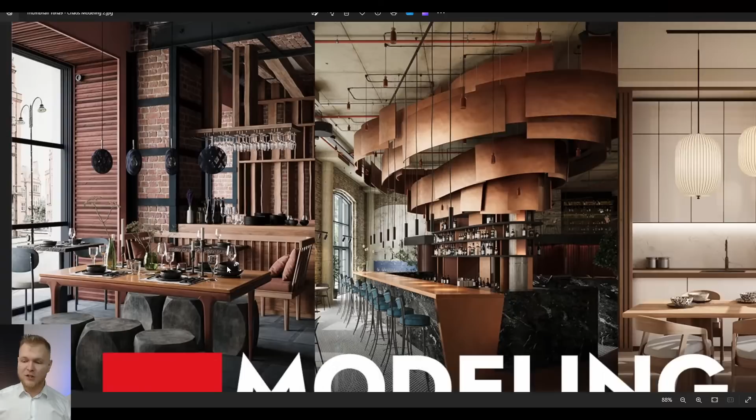Now, since I am legit now, we're going to continue by moving on to our actual work. So as I mentioned, we're going to be talking about this interior. For some reason, and lucky for me, you chose this one, and to be honest, this was the second easiest interior, because this one is number one when it comes to the level of difficulty. This is level 2 and this was level 3, so lucky for me, I'm going to be working with medium difficulty, and I think we're going to have a lot of fun.

What we're going to be dealing with is our student's scene, which was created by Kamila Kosarzecka, and thank you very much for sharing this beautiful scene with us. This scene was created during our training, but this is beside the point, because today we're going to be dissecting the scene and building it from scratch.

To make this possible for you viewers, we're going to be also sharing something quite cool, because you're all going to be able to download this pretty easy floor plan, but I did set up a few traps here, because in order to get all the measurements, you're going to have to follow my video, which is actually a nice trade-off. But let's get into it.

I'm going to try to put as much knowledge in it as possible. Also, we're going to be talking about a few elements. So, for example, how to create this type of lamp, because I believe we're going to be able to explore a few cool tricks. How to create wooden beams and how to make sure that your wooden elements do look a little bit used and a little bit more, well, let's say aged. On top of that, we're going to be building those funny chairs, and well, probably we're going to be building a lot, but I would like to put a disclaimer first that we're going to be also using some pre-made objects that you will also be able to download or find online.

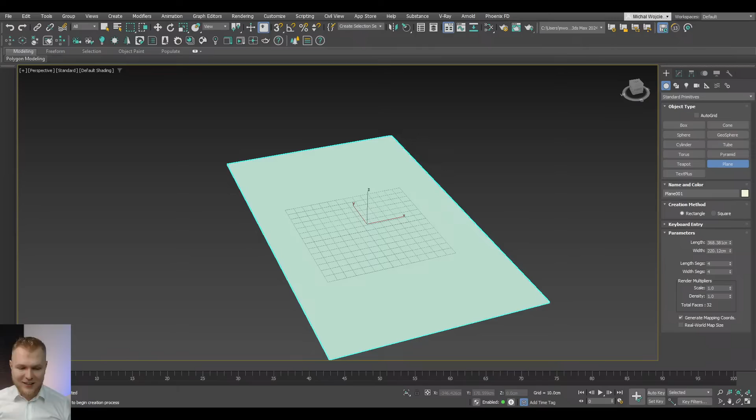Oh stop, it wasn't the campus, but keeping it realistic. Oh sure, sorry Theodore. So not the campus, but keep it realistic. Sorry for that, Theo. I don't want to oversell you, but still, I'm going to stand by the part where you're an awesome guy.

By the way Mike, what tool do you use to write on images in real time? I mean the pencil, it's called Epic Pen, and this is how it looks, this is what I do, so you can use it as well. I'm too lazy to set up any shortcuts for it, so that's why I'm not getting any faster clicks, but regardless, let's continue.

So the first thing we're going to be doing is dropping our image not as a background, but as an image on top of what we're dealing with. So I'm just going to drop it here. The idea is that we're dropping it in order to use it as our backplate or template for what we're going to be building.

So it's a good idea to also read some specific information about the image itself. Sometimes you're not going to get this window, and turning it on in some versions of Windows isn't really fun. The best thing you can do is hold your mouse for a second to get the dimensions, or right click on the image and go to Properties, Details, and get the dimensions: width and height in pixels. We're going to be using those in a second, so I'm just going to write them down in my 3ds Max.

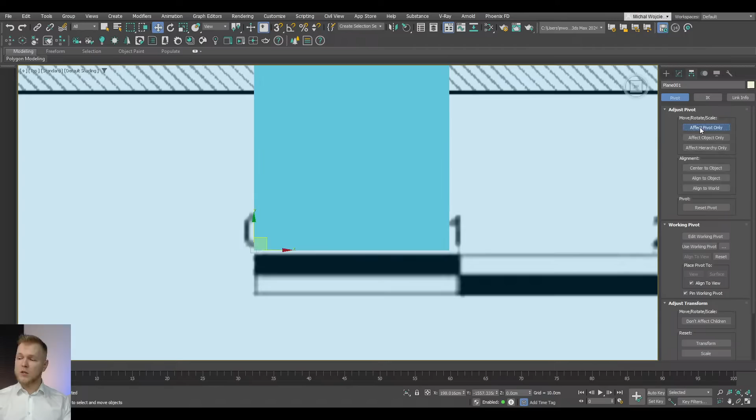I think I am going to rethink my life and quickly click that and go for the affect pivot only to adjust it a little bit further. So now we're going to be scaling it down, up until I'm satisfied. I'm pretty satisfied with what I've got, and remember, if your image has 3 to 5% of imperfections, it's not going to be something that you can really see, and nobody's going to be able to really notice.

What we're now doing is we're creating this image, so it's for those of you that just joined in.

Okay, we've got, hi Mike, I'm from China. Now it's 1 a.m. Beijing time. How's China today? Sir, I watch your speech with subtitles later. I focus on your speech and the model ends suddenly.

Okay, makes sense. So we're going to try to get some kind of software that will allow for the subtitles to be created during the live stream, but unfortunately right now we do not have the technology.

Okay, we've got religious people again. Blender is the best. Yeah, and nobody asked, thank you.

Now let's continue. Okay, so the first thing is a plane.

Yeah, obviously. Oh, hello, Monique. Hi, how are you doing?

So, why didn't you just snap it corner to a box? That is actually a very good question, because we're going to be introducing snap in a couple of seconds, because remember, we're trying to be beginner friendly as always. So I'm going to try to give you a little bit of a margin for mistakes, but we're also going to try to get better results.

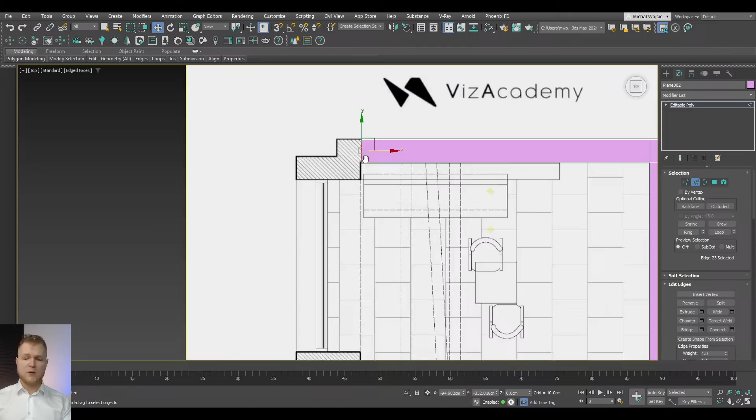So what should you do? Are you going to be just shift dragging and splitting it in half? That's going to create unnecessary geometry in your case. So feel free to just move this element a little bit to the top, so you're able to move this downwards. Since you're here, you've got two options: either aligning those vertices by eyeballing them, which is silly, or press R, select uniform scale, and scale this down. By scaling it down at least twice, we'll get to a point where it's essentially flat.

Now we're going to be moving it slightly lower, and again shift dragging those elements. To ensure everything is aligned, I can select all the vertices and quickly shift drag them to make them nice and flat, and repeat that process here. We'll continue by shift dragging those elements to create the window. I'm going to go all the way to this point, continue here, and probably also here, but I want to close those walls.

How do we do that? In normal circumstances, you'd shift drag this and then weld those elements, which is the correct way of doing it. But what you can also do is select the opposite edge and go for bridge. In this case, it's going to be nice and easy.

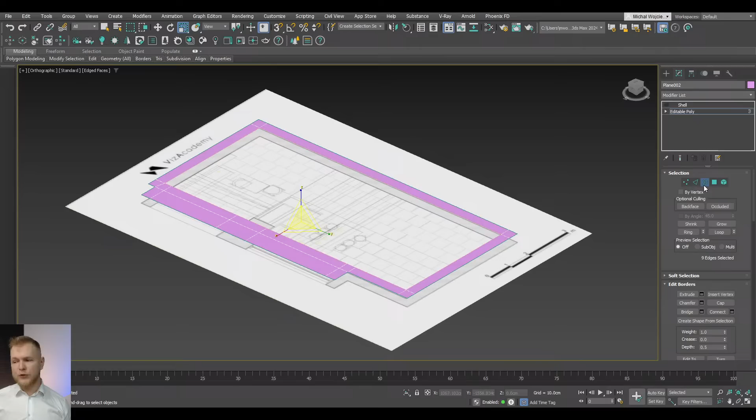And we do the same for the inner part, so we go for create shape from selection again. This will also make it clearer why I used the method I did, because we're cutting corners and saving a little bit of time.

So now we're going to get to shell. We activate the shell, and typically, if I know how many windows I'm going to get, it's going to be just one opening for the windows, possibly for the doors too. So you know you're going to need those extra elements. In order to make sure no light shines through your building, you can go for the outer amount and inner amount.

So the inner amount is going to be approximately 15 — we go below 0, so we're digging our object a little bit deeper. Then we go for the outer amount, which is going to be 420 — which is 420 for those of you interested in that, but no, I'm just joking, sorry for that.

Anyway, we're going to be adding 2 extra lines that will be very helpful, so 2 extra segments, and those are going to be our openings for the windows that are so important for this project.

Typically you'll also have doorways, but we're only focusing on the main shot itself. So we're creating one camera that we can move around a little bit. We can place it here to look at everything in this vicinity, or do a couple of close-ups for the props. That's going to be handy a little bit later.

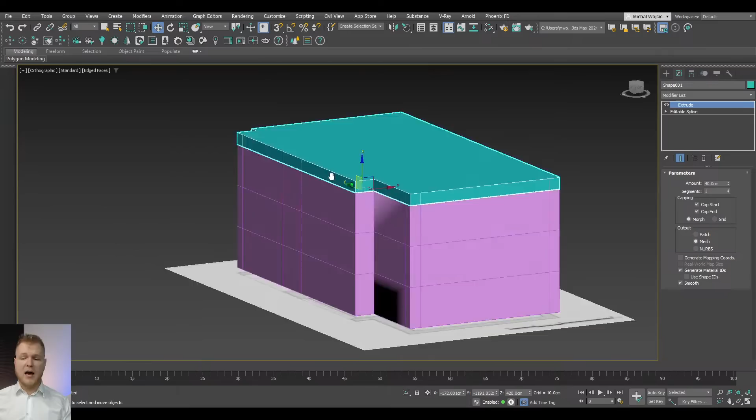Now we're going to copy this object, which will be our ceiling — Control V to copy it again, minus 40 for the object, and place that copy at -1, or actually -2, to make sure our floor, once it's inside our object, is taken care of. Now you can see we've created a closed block.

Why do we do it this way? First, we want to absolutely ensure no light bleed happens, and by adding two separate objects, we make sure no light passes through any of our geometry, which is fine, I guess.

Now we're going to select the edges. Remember the edges are also created inside your mesh, so we have to select all of them. Go to vertex selection, select everything you've got here, and type in -1. Why -1? Because that's going to allow us to get a little bit easier floor detail in a second.

Now we're going to type 320, because that's how tall our windows are going to be. Then we can Control Q to do a little bit of trickery.

So, number 4, we select two polygons and shift-drag them like this. For those using an older version of 3ds Max, you can do the exact same thing by selecting those two polygons and going for a bridge — this essentially creates the same effect, but swift modeling is a little bit easier if you're using a newer version of 3ds Max.

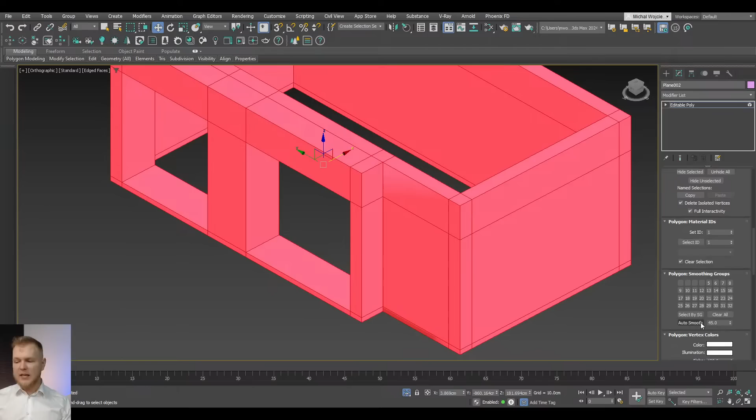You can see there's a little bit of glitching going on here on my model. That's due to unforeseen circumstances I cannot explain — it's just the smoothing groups acting up funny. So what we can do is go for element, scroll a little lower, and here we've got all of the smoothing groups. In my case, I'm going to clear them all, and that's now problem solved.

Amit, hello, nice to have you. How are you? It's full guide, or yeah.

I hope I can create similar renderings like Mike one day. Well, there is a chance that if you're going to be following Chaos Campus and our YouTube channel, you can actually do that. So let's go ahead and show you another cool trick that I use all the time.

You click on the top of your ceiling, go to Object Properties, and to make sure that it's not going to be getting in our way, we're going to be displaying it as a box. In some cases, if you're working with more complex scenes, you may also want to start using layers. In my case, because we want to keep it simple, I'm not going to be putting elements on layers, but since I mentioned it, it's that simple.

New layer with object selected, and now I can just name it ceiling, and for example, freeze and unfreeze the whole thing. So in my case, it's going to be just an object that is frozen because it's working within the layer boundaries. So no longer can I select this element, so it is not going to be getting in my way, but I do know that I did create the element, and well, I'm good to go.

So now we're going to be using the other shape that we also created earlier on. So this shape is going to be our floor. Let's rename it to floor 001 because we're going to be using this twice. Now I'm going to be selecting the edge. Press 2 on your keyboard, go here, and we're going to be shift dragging this a little bit deeper, up until to the point where the windows are going to be placed.

So in that case, we're going to be going for the object that we also created, which is our floor 002. But now with all of those lines, this is getting a little bit cluttered. So this is the point where you can start using the layers if you want to, but if layers are not your style, you just press H on your keyboard, and this is the select from scene or object color. So we're going to select the object 002. Now we're smart, so we know what that is, so we can select it, and it's easier for us to manipulate the whole scene.

For the first time, I'm going to be also recommending you to get your hands on one of the plugins. It's free for you to download from CG Source. So this is the website, and go to CG Source and look for floor generator.

The installation process is absolutely the easiest thing ever, and the free version we're going to be using works with a standard running bond, which is pretty much what we needed. I could also use Corona Tile Map, but setting it up in some cases is going to be more complicated for beginners than anything else.

In this case, I already have the floor generator installed. So if you do need it installed, please make sure to pause the video, go get it done, and come back to us, because you're probably not tracing everything I do right now since it's going to be a bit too fast. At some point when you're working on your own scene, that's what you can do.

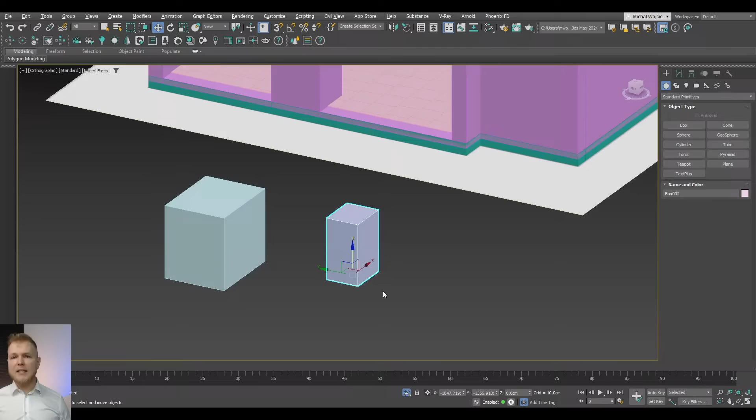So instead of risking that your object is going to be slightly above the ground—because in this ortho view it's impossible to tell whether the object is on the ground or not unless you're looking at a very certain angle—if the values are very small, it's really impossible to tell.

That is why, to make sure the tiles are going to be in the right position, we always try to make sure our floor doesn't exceed 0. Unless you're going to have some carpets, that's going to be a little bit different story.

Here we're going to go for the ground length, and we're just going to be adding some nice values. 3-4 centimeters will really do the job, but we also need to add the minimum offset of approximately 50%. You can also get the maximum and minimum, so it gets a little bit more random at times—you can see the pattern is now a little bit crazier, and this is going to be good for some scenes. I noticed not a lot of people actually use this option.

Hello from Afghanistan. Why doesn't the see-through work? What do you mean? I'm not sure what you mean, really. Could you elaborate on that?

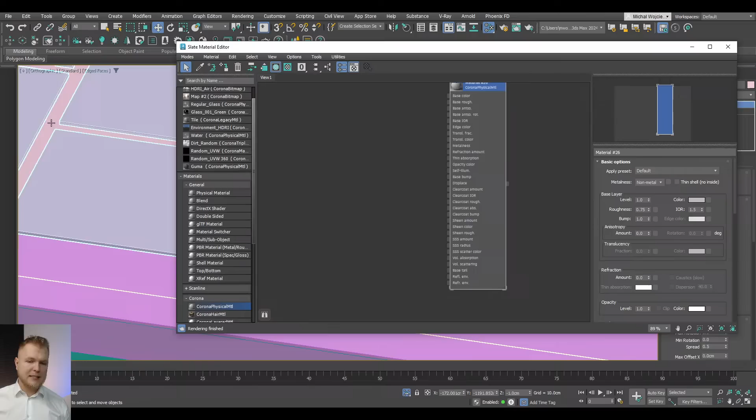What I prefer using instead is Corona round edges. As we're going to be actually using it later on, I can prepare a mock-up of the material to show you why I would be going for something like that. So Corona round edges, and this is the chamfer, or what I would be using instead of chamfer.

First of all, we're assuming that this is a tile. This is not an object that we're going to be viewing from close-up purposes. So since it's going to be just part of our scene and not the main element of it, we are allowed to not be as precise with everything. Now, since we're here, I'm going to have to set up some kind of simple lighting.

For that, I'm just going to go for a single map and add in Corona Sky. Later we're going to be editing that, but for now we're going to be able to get this done.

So the reason why you would not use chamfer is that, first of all, chamfer is going to be adding a lot of geometry. Bevel is always going to be very stiff, and it's going to create only one line, and Corona round edges is going to be very flexible, and it's going to absolutely obliterate all of those options with one simple trick.

I'm going to explain all of that in a sec once we reach the materials, but if we create a very nice looking material, look how chipped the edges are on my tiles, and this is something you cannot get with chamfer.

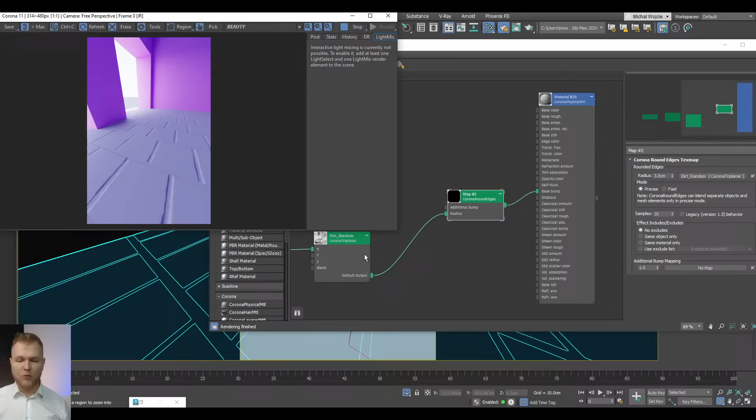So long story short, this is the right way of doing things, unless you're going for close-ups. Then you're not going to be that happy, because you probably want to use the chamfer.

Okay, so now I'm going to be moving a little bit to the left, because I've noticed that I was a little bit on the edge of the screen.

Mike's right, of course. If you want to save resources and render time, round edges is a great option.

I'm just very much into small details, and this is why I tend to go with chamfer. It's just like I like it more. That's it. Because a lot of times it's not about calling the technique proper or not. It's just that sometimes you feel more comfortable with something because you know how it works, you have more control over some aspects you want to work with, and that's when you select the technique you feel more comfortable with.

After all, we're artists, so we're not necessarily going to call everything proper technique, that's why we call our tricks techniques and tricks. So yeah, we're pretty much martial artists, but in 3ds Max, and nerds in front of computers.

Okay, got a little bit into a dead end there. Also thinking the same.

Hello from Egypt. Hello from India.

Hello from South Korea. Sir, can you hide objects while working on one object?

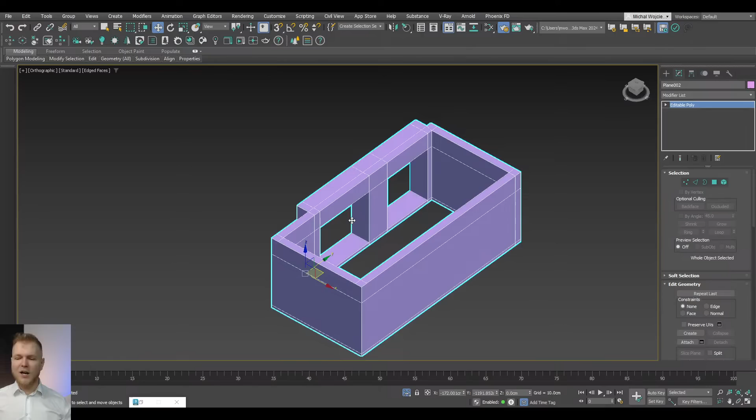V-Ray can be very rewarding but also very punishing. I never had a situation where I left my render overnight in Corona and it turned out I used the wrong number of samples and the wrong anti-aliasing algorithm, messing up the whole render, only noticed on the second frame because the first was perfect. That's V-Ray, while Corona is consistent, predictable, and easy to work with. That's why I'll always choose Corona, though V-Ray isn't bad - it just requires you to be a bit of an engineer before you get good at it. It's the type of software where you have to get good.

Now, why don't you use the extrude for floor generator? Why don't you use extrude for floor generator?

We did use extrude for floor generator. In this case, you can see I'm using it with a certain value to make sure I'll have full control over the tiles once I set them up, because I'm going to be doing more than just placing them.

Mongolia, that's a first - I never had anybody from Mongolia in our chat, thank you for joining, Nimba. I'm looking at you from Brno, Czech Republic. Oh nice, Ludek, that's where Corona was actually created. Your seminars are the best, I haven't found a better one anywhere. Congratulations - thank you Ludek, I really appreciate that, that was absolutely out of nowhere. If you go to Prague you can actually visit Chaos or Corona's main base and have a little bit of a tour there. I'm going to visit them at some point.

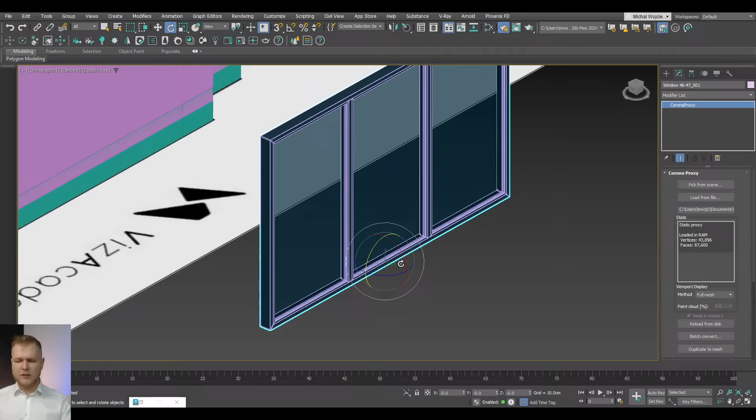So what do we do with a window like this? We only want one window. With three bars, we could just rotate it, but that's not what I want to do in this case - actually that would be a little bit smarter than anything else. So, I'm just going to duplicate this to mesh. I'm still going to follow up on the idea I had in a second.

If this is going to be problematic and you want to have only one frame, you can go for a symmetry modifier. Instead of adding geometry to your model, you can actually reduce the geometry. But be aware that symmetry is always going to cut with a certain slice threshold, so you want to turn that off and make sure to weld the seam, otherwise we're going to have a bad time. So let's lower the slice amount, and now we're no longer welding the elements we're not supposed to. Let's move this a little bit, and now we have just one frame. That's a very neat trick if you ever need it.

Let's go ahead and continue. This window, I think, we can rotate it by 90 degrees. Nobody, I guess the window police isn't going to come to Facebook, so we're just going to continue with very cheesy puns.

Now, because I want this window to fit exactly where I want it, I'm going to isolate those two elements. Since the object by default almost fits, I'm not going to need a lot of changes, but I'll make sure it's placed a little bit inside of the wall. Now I only need to go to editable poly and move the element as much as I need. In this case, I can follow up with any part of my window, but I'm just going to make sure to move the elements under 1 and 2.

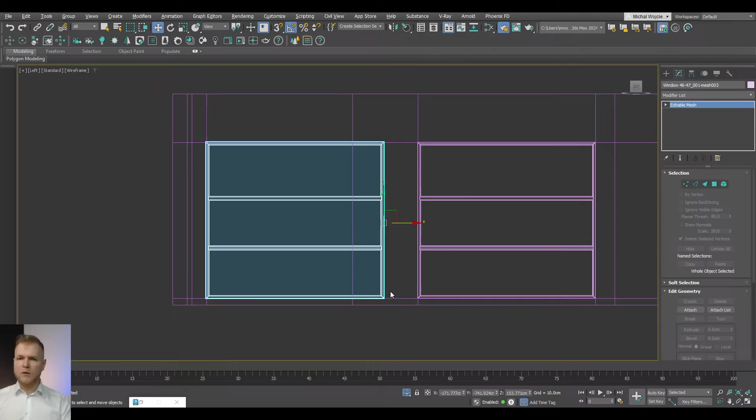So why am I not using snap again? Because I don't want to. It's really not a good idea to always snap to every corner and every aspect of your model. Sometimes you want to allow objects to intersect, as you're going to gain a little bit more thanks to that. What are you gaining? Well, intersecting geometry in older versions of Corona and V-Ray was a big problem because sometimes some maps, some light could bleed through the walls. Today, the rendering engines are so sophisticated that it's no longer that much of a problem, so I believe it's actually better to leave it that way.

Looking at the floor plan, which is buried way deeper than I wanted, we're going to hide the floor for a second, and you can see there's another floor, another detail here. This is a box that I'm going to use as another detail. You can see that this brick wall is very important for our build, so we need to keep that in mind, and we're just going to create a box. Yes, that's how you can handle it—it doesn't have to grow out of your wall, it doesn't have to be part of the mesh. This can be a separate element, and that's going to be more convenient for us as we're going to be adding a bit more detail to it.

So let's drag it up. In this case, I'm going to place it at somewhere around 330. Shift drag it to the top. Again, I can intersect through the walls, doesn't matter, and we're just going to go here. Because I want this to be symmetrical, I can make it symmetrical by simply using a symmetry modifier and going for that—either flip it or make sure to rotate your mirror along the axis. So convert this object to editable poly, and the reason we're holding this object as we are is that we're going to be adding a few extrusions here.

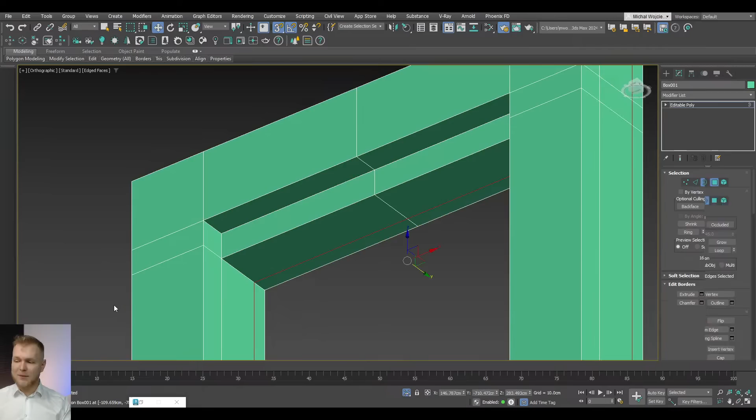cut this element out. Normally, you would be going for delete and trying to chamfer or bridge all of that. But now in 3ds Max, we can be a bit lazier than that. Shift, drag, and voila, we're done. No welding is going to be needed, but be aware that sometimes this technique can actually give you a few headaches because it's going to be imperfect.

On the opposite side, I'm going to do the same, and I'm going to adjust one of the sides in a second. Doesn't matter which one, because we're going to be able to use symmetry if we want to.

So in a second, we want to create this T. You can see that we want to basically create a double T because there's going to be two of them, and those are going to be held by some kind of extra elements around all of those objects. So how do we do that?

Well, obviously we're going to be starting with the most primitive possible options. So let's go for a simple detachment, detach as clone, and we're just going to continue clicking. To make sure that this object is going to be nicely connected, we're going to go for connect. Now we can also adjust some of the pinch in order to make sure that our T is going to make more sense.

Again, we're going to go for the same technique, but this time we're going to be lowering the value. If you are lazy like me, you can actually skip deleting this part and just create a larger C, but just for the sake of consistency, let's delete those two elements and pretend that we cared.

Now, shell, and let's just clear out the values. 15, okay, and the 15 is not needed. Convert this object to an editable poly, and we're going to be dragging it all the way to the opposite side. So again, it's nice and easy.

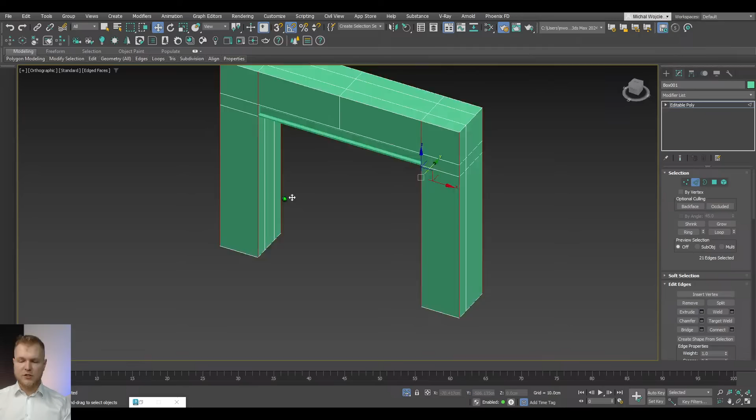So we also need those extra bars that are holding everything. So the easiest way of doing it is to double click, continue double clicking. It's very important to double click, but not too much. Double click again, double click, and we're trying to select all of the edges that we're interested in. So pretty much that. As long as we selected all of them, we're going to be able to create what we need.

Create shape from selection. This is one of the most efficient tools in 3ds Max, really. Yes, creating splines out of your edges is just such an easy way of working with 3ds Max.

And now to have full control, I'm going to go for rendering, enabling viewport, and we're just going to make sure that instead of radial objects, we're going to have rectangular objects, and we want to be smart with it, so we're just going to be making them a little bit larger.

So here we now have something that covers our walls, but in some cases you might not be very happy with it, so you're going to be probably a little bit inclined on using actual properly prepared elements. But in my case, I'm going to be saving a little bit of your precious time by doing this the way I did.

Because again, it's going to be easier and faster, and the difference of 1 centimeter at the distance from the camera is not going to play a major role. So it's just easier to do it that way.

But if you want to be precise, I do suggest you use the sweep modifier instead. The sweep modifier can pretty much allow you to create the angle, and that's pretty much going to be the end of it, as it's just going to be easier.

I should have used the T here. Yeah, so let's continue, but without the sweep modifier, and possibly convert to an editable poly. Perfect. And now we're going to be continuing.

But to make it super easy, first clean it up a little bit, or cut out what you need in AutoCAD, create a new file, save it that way. Then once you're there, you'll be able to clean it up in 3ds Max, which is efficient. Working with those files directly in 3ds Max can be overwhelming, so I don't recommend that.

Okay, so let's convert this object to editable poly. In my case, what I'm going to be doing is I'm just going to try... Sir, can you do how to create a realistic V-Ray material?

I mean, we could. You know what, I just figured something - those edges are really looking good, but I figured another thing I could do because it's a box. So give me a second.

I'm just going to quickly recreate this up until this point. Sorry for changing this method, but I figured it's going to be fun and educational for you to also use one extra option. So let's attach this, and now we've got those edges, right?

In my case, I want to make sure I'm using chamfer, but not the smooth end. Sorry, not that - wait a second, yeah, this option. So we're going to be reverse chamfering, or deleting what is not chamfered, so it's a little bit easier.

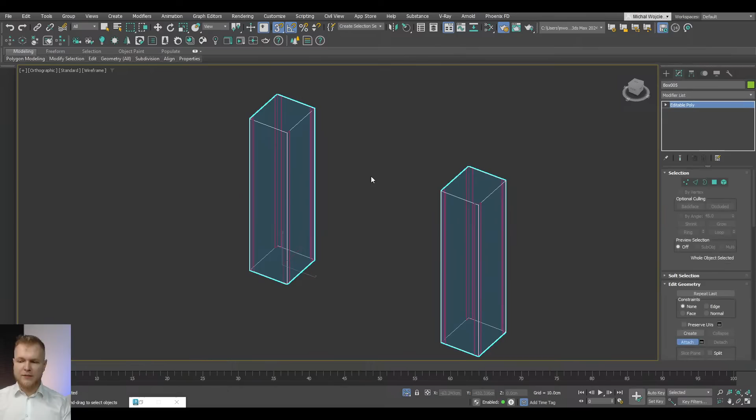So just purge the file in AutoCAD before importing it into 3ds Max. Purging is good, but sometimes it just doesn't do what it's supposed to, so it's not the golden standard, I would say.

So in this case, let's go for, again, 8 centimeters, 6 probably, 4 - yeah, 4 looks nice. We're going to be clicking here, and we're again in the clear. So to add this on top of it, we're going to be adding that extra shell modifier, and we're good to go.

So now we've created all of the detail, and now we're going to be continuing building our interior. We need the ceiling, we need the beams, and we need to start adding the props. The props are typically going to be downloaded from Chaos, so it's going to be way easier for us to set up everything. I want to set a camera as well, so we can test if we made some major mistakes so far. So let's go here, we'll see.

Shift F - so Shift F turns on the safe frame. Safe frame is going to allow you to pretty much look through the window exactly of what you're going to be rendering. The proportions I'm using are 1080 by 1650, so it's going to be slightly easier that way. So again, we're going to be adjusting our camera up until we're satisfied with the view.

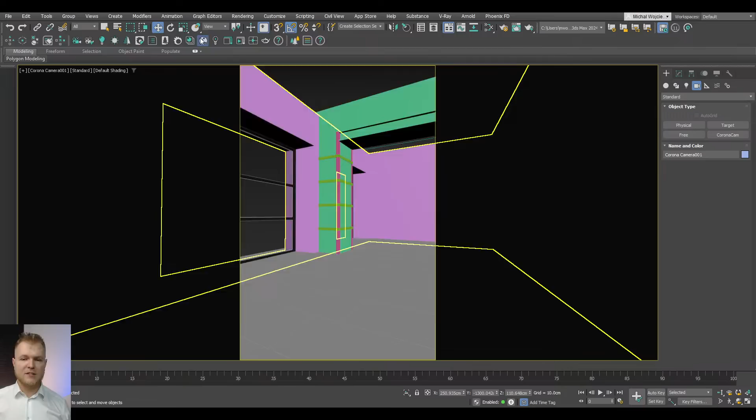Hope that this helps. Okay, now let's continue, because now we kind of need the furniture inside. For the furniture, I'm going to be using some of the furniture that's available in the furniture assets, so we can just browse that together.

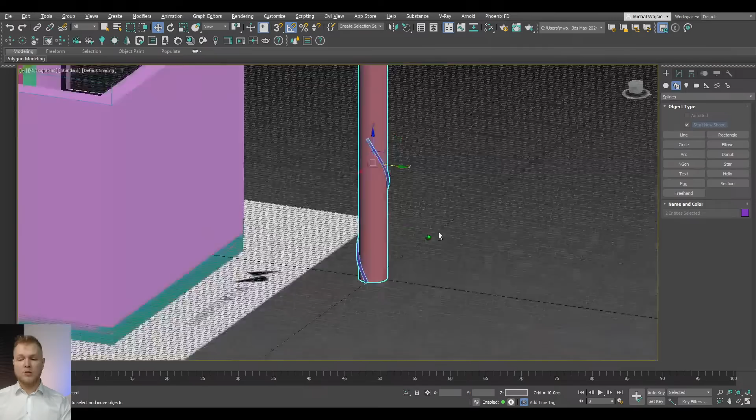So what's next? Radius 25 by 25. The reason why I made sure the object is on 0 is so that I can type in 0 by 0 and by 0, so all of the objects are now working really nice. Because we're consistent, we're going to add the height of 600. And now the fun begins, because we're going to be adding turns. That's going to be pretty much enough for me.

Okay, let's change the rectangular to radial, because that way it's going to be a little bit smoother. And now you can see that we pretty much created the pipe of our dreams. But let's make sure that the thickness is bigger, so it's easier to spot the detail. Convert the object to an editable poly.

And now we're going to be also adding this as an attachment, so we don't want to have any problems with the model if you just decide at random to have some kind of additional detail there. So we can delete the caps.

In my case, I'm not going to be adding turbo smooth, but if I would be, I would have two options here. I can go back, add turbo smooth, and you're going to see that the top is now looking a little bit funny. To avoid that, we can go by smoothing groups, and it's still going to be straight up, and it's going to be quite nice.

The reason why I've added so many edges is to show you how nice this technique is, because now I can create some kind of line, a pipe, or whatever I want. And if I'm placing a lot of those objects on my vents, ceilings, and whatever I want, I can just change it in a second.

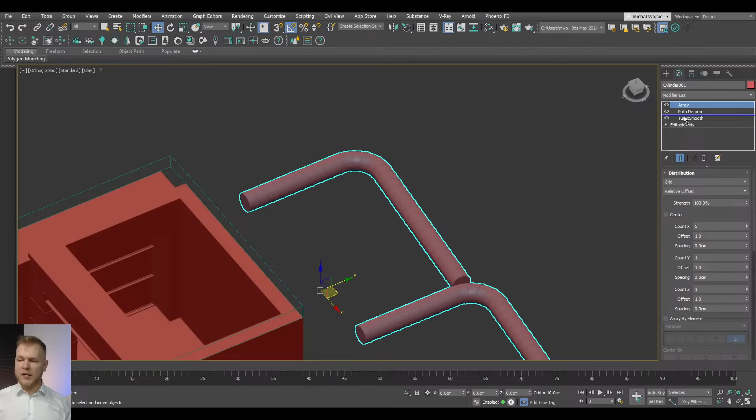If you're going to be very precise with what you're doing and you're not adding random numbers, you can also add array before the path deform, but I probably should be saving this file for a second, because if we added the array before that and we have perfectly calculated our pipe, it's going to be actually quite cool, because now we're going to—wait a second, let's make sure that this is set to 1.

Come on, 1. Let's turn turbo smooth off, because I'm streaming and my computer is a little bit sweaty, not as me. So now we can pretty much, if I would be more precise, make sure that all of them are aligned, and I can create infinity pipes as I please.

So it's going to be nice and easy, and this is pretty much an interactive model now, because I can continue building with it, and all I need to do is make sure that either I'm cutting it at the right angle or adding a little bit of fillet, because we want those pipes to actually have some possible usability in our scenes.

And I hope that's going to be helpful to you, but none of that is going to be helpful to me right now, so we're just going to leave it be. So let's delete those modifiers and delete that shape. But I hope, again, it's going to be something that you're able to use.

I use it, for example, to modify my couches or some kind of windows. A lot of that is really possible with this modifier. So, 90, okay, let's put it closer to here. I think we're good to go. Definitely too big, so let's lower that a bit. Look at that, it's in the right position.

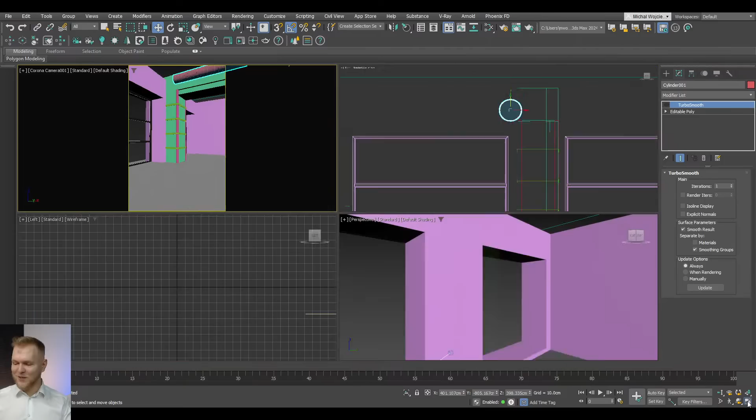Now what I wanted to do here is create the beams. So we need at least one beam to get us started. But I'm not going to be creating this on the wall - so how do we create our beam on the wall to start it exactly where I need it?

Well, I can Alt-Q to hide everything I didn't need, box, auto grid, and holding Alt and Control, I'm going to be able to create a nice box to go all the way from top to bottom. And now it pretty much reaches out from one side to another. Because we do have that floor plan, I can now use it as well.

So let's make sure to change from clay to default shading, and let's see where those beams are supposed to be. The first beam is here, and it's a little bit smaller. Let's make sure that it's going to actually follow up. Unfortunately, for some reason, we cannot lock those values, but it's not going to be bothering me.

So let's make sure that it's higher, taller, and now we're going to be either arraying those, or we can just continue copying the object. But I believe that going for array is the best thing you can do in such situations.

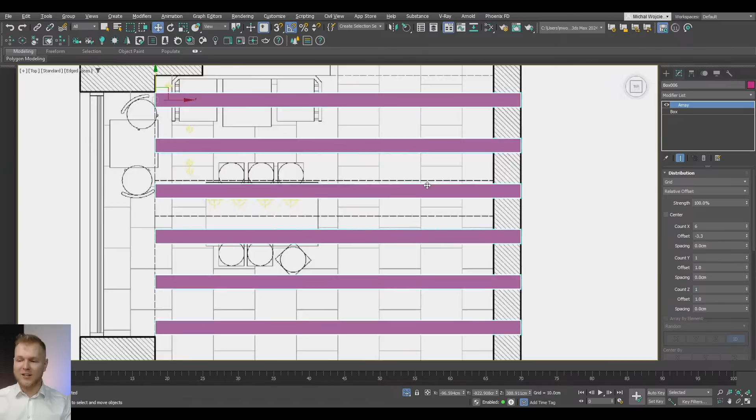Okay, so the reason why I went through all of this trouble with array is to now add the subdivide modifier. Subdivide is going to create seemingly random geometry on our object, but it's definitely far from random.

So before that, we can also use chamfer to add a little bit of smoothness to our object. Make sure the chamfer is set to no smoothness, or just smooth chamfers only, so it's still going to be a beam and not a cylinder.

So chamfer, yet again, let's make sure the amount is set to something around 6, segments 2. Subdivide and subdivisions are going to be automatically adding a little bit more geometry in between the elements.

And on top of that, I'm going to be adding the noise modifier. The noise modifier is the most important of them all in this case, because I'm just going to be adding a slight 3 by 3 by 3 value.

And the trick is that right now the beams are pretty much waving the same way. But since we've added all of that on top of our array, if we lower it, we're going to be able to break the pattern a little bit, and each beam is going to have a slightly more natural look to it. If we go for fractal, it's going to follow up with more of that.

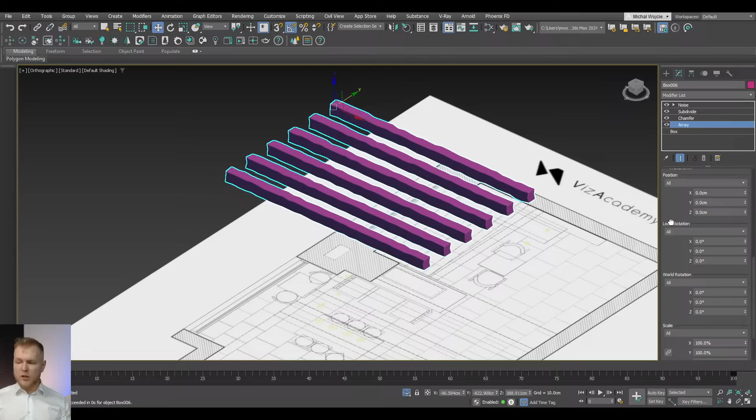So now we got those customly made beams, and if we want to, we can detach one of them to manipulate it further. And thanks to the fact that the array also has a couple of options in its sleeves, we can also add some world rotation and scaling onto our objects, we can pretty much add a bit of incremental rotation, for example, on one of the axes. So it's going to change the beams slightly, but in my case, I don't need to do this because the noise already works very nicely.

So that is why we're not going to ever get the appropriate result. Okay, well, let's copy this again, move it somewhere around here. Perfect. And now we're going to be going for an XForm modifier to just shrink it, but before the noise, so it's going to be shorter, and we're not going to have any objects poking through our scene because that's going to just look bad.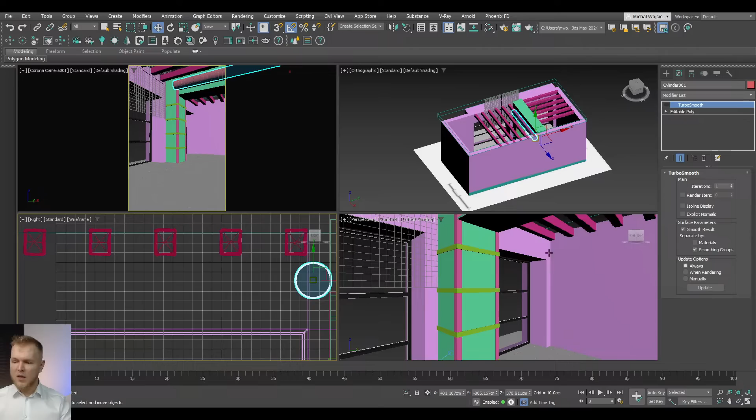Okay, let's continue. So now we're pretty much in the clear. We've got the vent that I hidden. Okay, let's put this higher, so almost 420. This is going to go lower. Perfect, and now we're close to the ceiling. So let's make sure that we are looking at this from the right angle. Okay, so this is almost at the ceiling, this is at the ceiling. Perfect, and this is supposed to be slightly lower, so we're not going to be intersecting those two. Okay, now I'm satisfied with what we've got.

What's going on? Oh, that's the grid from the auto grid, because I've used Control and Alt.

You're a handsome man, thanks for that tutorial. Yuki, are you that Yuki that was our student, or is this somebody else? Because that is also a very random thing to hear, but I appreciate that. Thank you, that is something nice to hear, really. Especially if you're a narcissistic like I am - no, I'm joking, but honestly, thank you.

Let's continue. And now we've got a couple of objects that we need to start adding materials to. A cool trick is to pretty much add Control A on everything that doesn't have any material to just add gray as a global color, because now I no longer need a material override, and I'm going to be able to start adding materials, and there are no random colors poking in my scene.

But then again, there's a random color for some reason on the ceiling, because the ceiling was already frozen at the very beginning of my webinar. So let's select it separately, and now we're going to be continuing.

Time Prophet, how are you? Pale Vizacademy UK, I would be here earlier, but I'm formatting a 4 terabyte drive.

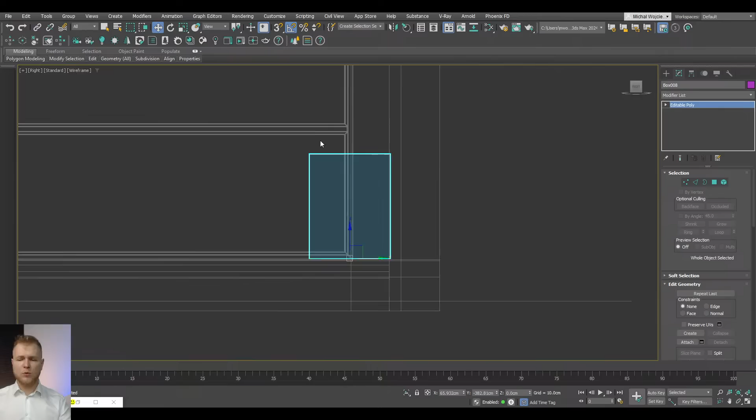First, let's build the bench at the back, because that's going to be something educational, as we're going to explore one tool that was recently added to Corona, and I think not a lot of people use that. Let's add a bench, 80 centimeters, convert to editable poly, and we're going to be editing this randomly. Right now I've made sure that this object is created on 0, so it's already saving me time, because I know I'm working in a predictable environment and I know exactly where the elements are going to be.

Remember that having predictability in 3ds Max is absolutely important. Okay, we've got this bench, right? So what I'm going to do is add shelves on top of it, but the sitting area is supposed to be around 40-ish centimeters, actually 38, and we can add some kind of pillows around here in a second. But now let's create the shelves.

Shelf number 1, let's set it to object. This is going to be going somewhere around 200 centimeters, but we'll be able to just put it somewhere where we like it. Let's go for 210. So we actually have some values here added. And now we're going to be creating 3 copies up until we reach our ceiling.

Array would be a very good choice here, but I guess this is going to be good enough. Okay, shell modifier, again let's go for 3 centimeters, because this is going to be a thick element, and we need all of those elements together. Now I need one large box that's going to be pseudo-holding all of those shelves. Those are not going to be necessarily welded to the wall, so yes, or screwed actually.

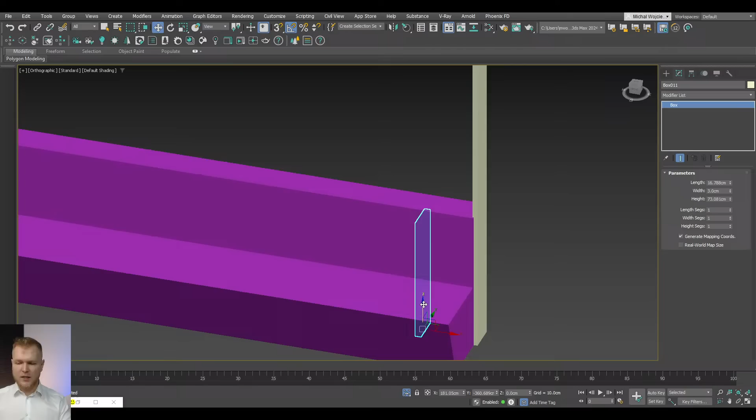So let's make sure to go to the Chaos modeling. Yes, this is Modeling for Chaos, welcome. Okay, so I want to do all of that. We're obviously going to be using very similar techniques that we did so far, but this was a huge problem in the past, where you weren't necessarily able to even do randomization in 3ds Max without really using scripts and referring to some kind of additional software, or it was just absolutely ridiculous.

And I want to use the tool that is now added to Corona. So let's make sure to make it nice and thick, a little bit thicker. Perfect. And let's copy it a couple of times: 1, 2, 3, 4, and up until we get to 6. Okay, 7. This looks nice.

If you can hear some weird tippy-tappies, it's Render, the dog, trying to get some attention, but right now you only have my undivided attention, so you win against him.

So let's continue. Render, okay, he got a little bit calm now, so let's 2 by 2 that. Z value, perfect. I know, you probably just figured out 10 extra versions of how you could do it better, but bear with me, this is going to be worth it. So, okay.

Now we've got all of those nice elements, and we kind of want to randomize them. So how do we randomize this? Because you know that this looks awful.

First, we're going to be adding the same method: Chamfer goes first, then we're adding a little bit of chamfer only. Then subdivide, so we get more geometry with a very consistent size, 12 because it remembers the last settings. Then noise to randomize it further, so we go for 2 by 2, 2 by 2, 2 by 2, and I can skip the Z value in this case.

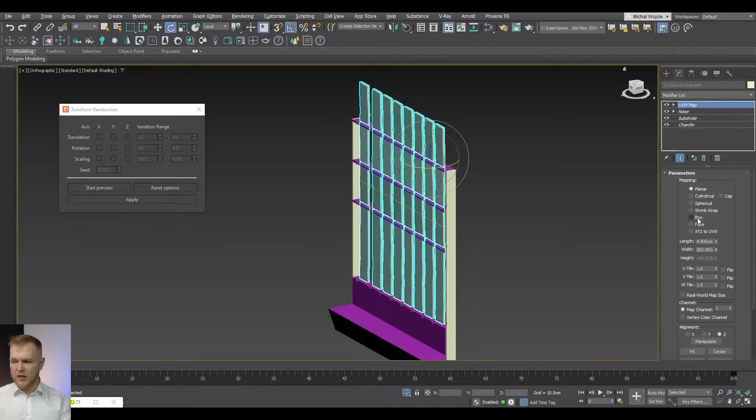So box 250, 250, 250. Now I'm going to be able to just take care of this map regardless of what I'm going to be doing to the object.

Now we're going to be randomizing the Z value, and we want to go for -30 to plus 30. Let's preview it, and that is absolutely amazing, because now we can play around with all of the elements we want. Scaling - I'm going to scale the object, let's say -15%. Let's preview that, and again the objects are now randomly smaller.

I can make sure that those are going to be bigger or smaller depending on the axis I choose. This is absolutely amazing, because it allows me to get more randomized, more natural objects in the scene. Let's further rotate it - perfecto, and perfecto again. If you don't like what you see, you can play around with the seed a little bit and apply it, and we're done.

This is something I found mind-blowing once I discovered it, because it's really cool. It allows you to get so much freedom in 3ds Max. It's probably not as groundbreaking, because a lot of people can just rotate objects, but imagine you've got hundreds of books or some kind of objects that need to be further randomized, and you don't have the power to go through it manually.

That's a good question. I'm going to use my trump card and show you my favorite photo of my dog, since it's a live stream. I'll be unprofessional, but this is my favorite photo of him. He climbed into a pot because that's the only green thing he could find, and he wanted to go out, and that's the way he went out. He didn't do any business in it, he just likes to sit on green things. That's the best dog ever. He actually climbed the window to get there. Probably not that interesting, but it was funny for me.

So we're going to copy a few elements from this area. Let's move them slightly to this position, copy them, and move them lower. This is going to be the base for all the furniture that we're going to be adding here.

So his name is Render.

When will you have rendering streams? Well, this is one. We're pretty much getting to the point where we will be rendering. If you want to watch me leave my computer to render, and then watch how the render is being performed, we can do that too if that's something you'd be interested in. But for now, we're talking, learning, and getting to the point where we'll be applying some materials.

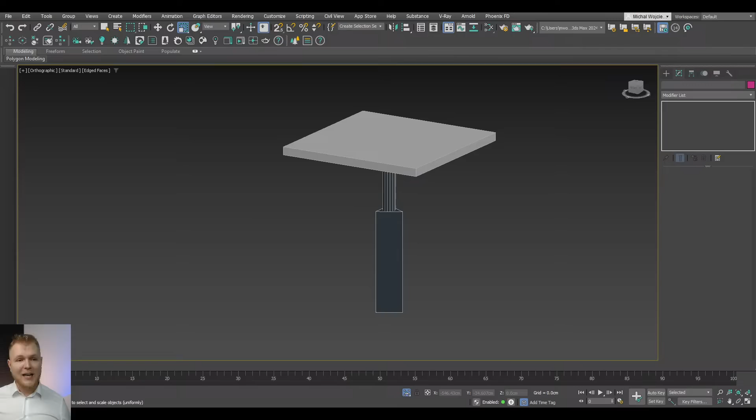So let's continue. I must say I'm surprised you haven't picked that up from the webinar itself. Okay, let's try to grab a restaurant table.

And this table, I'm going to show you, you know what, I really don't want to model all of those small objects, so I hope you'll forgive me that we're going to be copying those props. Those are just bottles and glasses, nothing exciting about this. This furniture piece, if anybody needs it, leave a comment and I'll be able to supplement you with this exact model if you want it.

This is how I use Copitor script. It's so easy to use, and now I'm going to just take this in.

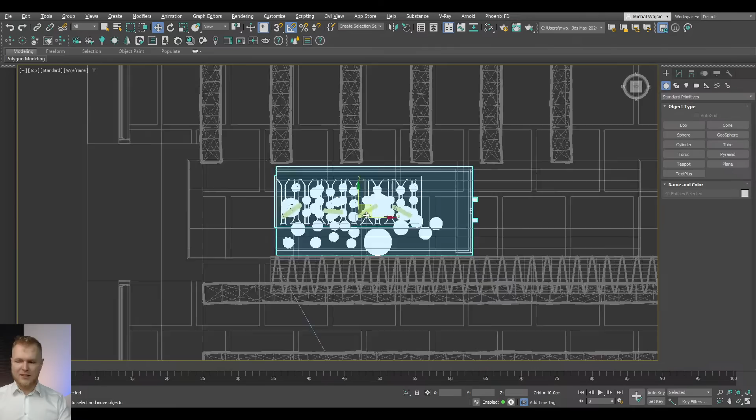Okay, now we're going to be saving a little bit of your time, guys. And again, this is just a furniture piece that's made out of wood, so there's nothing special about it.

So I believe that we're not losing anything. But some of you did ask in the comments on our Instagram how to make this specific lamp, and I'm...

going to show you a step-by-step process of it, and I'm going to be also showing you how to do those chairs, because those are actually more interesting.

I've got a serious... I'm serious.

How important is an architecture degree to land a job in ArchViz interior design? It's not important at all. You only need to have basic knowledge on how to read the floor plans, and essentially you kind of have to be aware of what is what.

Because some of the markings might not be just clear enough at first glance, but this is not something that you need any degree for.

So this is pretty much going to be, well, spend a couple of minutes to learn how the drawings are made. What does it mean to have a red dot?

What does it mean to have a red wall, etc. It's going to be just very simple things that you just don't know because you haven't had any experience with that. Once you know it, it's simple and you can continue.

Do you need any architectural experience, degree, or knowledge? Well, not exactly, as long as you're not going to be designing. If you're going to be designing, at that point, you kind of want to have some knowledge because you don't want any elements to fall on somebody's head, right?

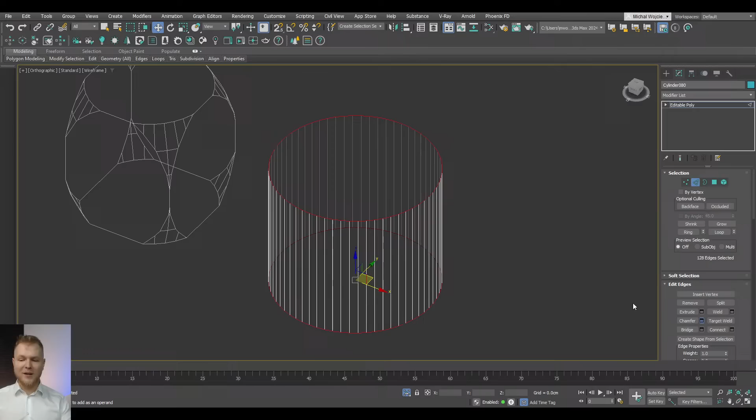So let's go to edge, chamfer a little bit, and we're going to be chamfering all the way. Probably we want to keep in mind that we want to make this nice and cozy, so let's add a couple of extra edges. This is going to be enough.

And now we're going to have some fun. How are we going to have some fun in 3ds Max, you ask me? Well, it's going to come down to using boxes. Boxes are always good to work with. So first thing I'm going to be doing is adding a little bit of width. Okay, length, perfect, and let's place it so that we're going to be cutting it somewhere around this edge.

Okay, I really overdid it with the chamfer, I really did. So we're probably going to go back a notch, or not. You know what? I'm going to continue, I'm going to be consistent. Let's just go ahead and cut it the way I want it. It doesn't have to be the same, I guess.

So now we're going to make sure that the length is here, affecting it only, and we're going to be moving it somewhere around here. Again, I'm going to be copying this 4 times because I want this to be somewhat symmetrical, but I'm not going to be caring about it that much. And now we're just going to be adding what we want to the model.

So here we're going to go for a Boolean, and we're going to be applying some subtraction. So subtract first one, second one, third, and fourth one. Oh my God, I really messed it up. Okay, I messed it up. Let's convert this object to editable poly still, and we're going to work with this slightly differently, because now I can fix this by going to FFD 2x2x2 modifier and just make sure to move it slightly lower.

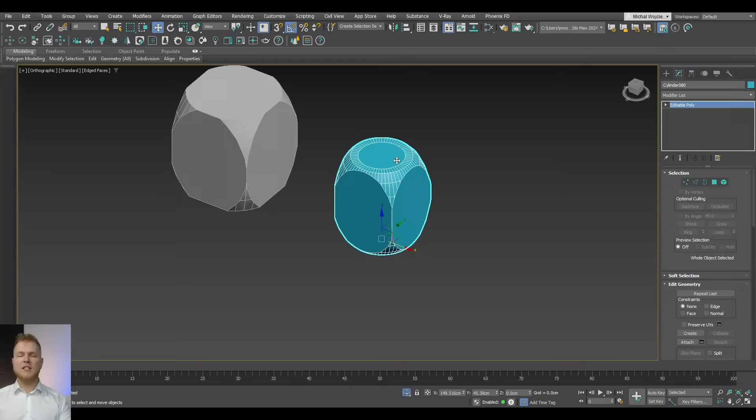Oh, let's change. Let's go here. Okay, now we are back, and we pretty much did the same-ish thing, I guess. I'm going to assume that we did everything correctly and I did not fail, so let's continue.

Strangely, I always start with a box and turbo smooth to make a sphere. It gives a great topology. It does, but the thing is you're really going to be caring about the topology. We can retopologize everything and make it into nice topology, because this isn't to prove my point or show off, but I could model this in a more intelligent manner to give better topology. It could be easy too, because it's all about figuring out the details we're going to deal with in our model. Or we could just make this easy. And if easy makes the model work and still look good, I'm always going to go for easy, because that's just better.

In most cases, people think that to be a professional, you have to absolutely follow all the professional tips and tricks. The only people that really care about professional topology are typically jerks - and I don't want to call you specifically, Time Prophet, you're not a jerk. But people who care about those things are typically not very efficient, and they only do that to make your life a little harder. If you're working within a company, they will always say that as long as it looks good, move on - we have 5 more clients waiting outside the door, so please hurry up.

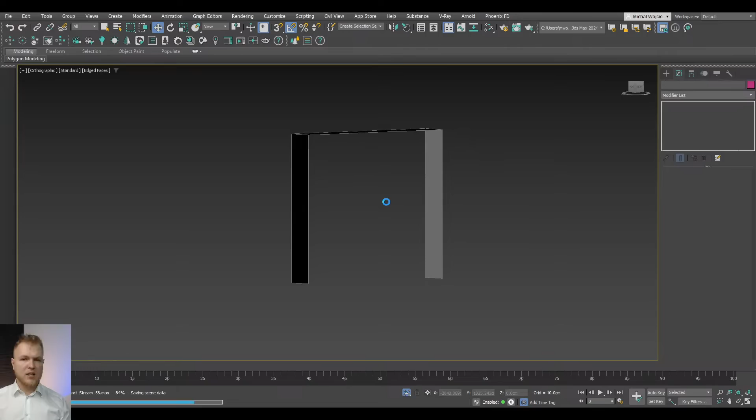The essential part here is that we need those polygons to be separate because they're supposed to be absolutely individual polygons. If we're working with an object that's three-dimensional and not two-dimensional, we're going to crash 3ds Max. So make sure you're working with objects that are absolutely separate and simple - flat. No boxes, no cylinders, nothing for floor generator, or you're going to crash your Max.

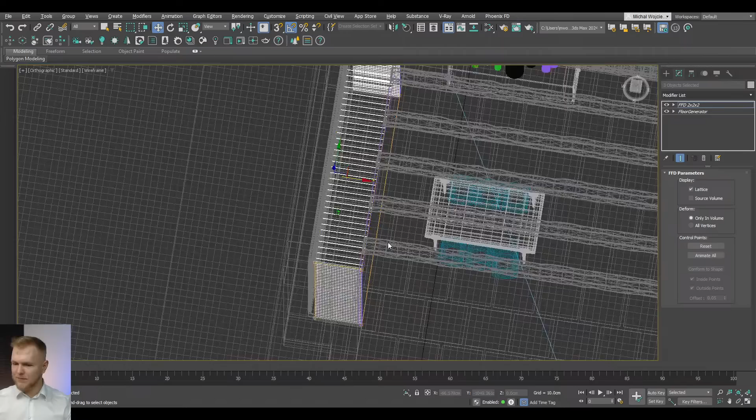There's a random arrow on my screen. Let's delete that, and now we don't have it. Okay, I guess my mirror is broken in this case. Well, get a new one. That's going to be a good idea.

Now let's see, I'm also sure that it's not that bad. Keep it on one axis and don't move rogue vertices, and it should work 100% of the time. I always say that for floor generator. Great work so far, thank you Kirli, that's highly appreciated. Keeping it as flat as possible is a good idea, but intersecting vertices or random vertices can do a lot, and you never know if you haven't made a mistake along the way during a live stream. So it's a little bit scary to have those small issues along the way.

Okay, I think we're going to be cutting a few more corners, so I'm going to be stealing more elements from the scene from my student. I would like to remind you that this is work by Camila, so thank you so much for giving us this chance to look into your scene, which was created during our training. Regardless, it's a nice thing that you did send it to us, because now we can create this beautiful, I hope useful, webinar for you guys. So guys, please a little bit of appreciation for Camila, she's the great mastermind behind this scene.

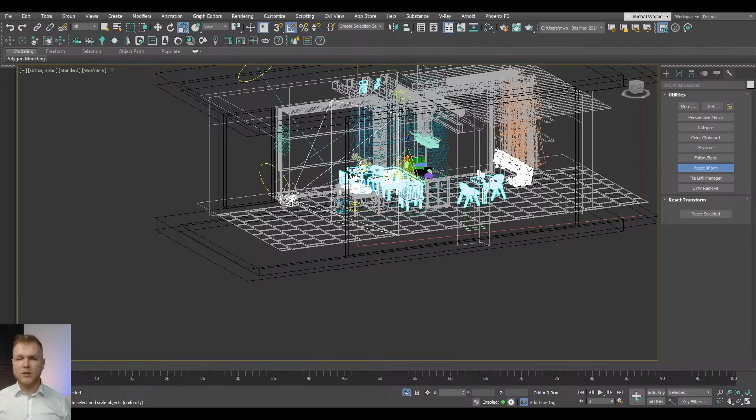Sir, what are your thoughts about Turkish architecture? Aiden, I don't have necessarily any big thoughts about it, because when I was in Turkey I really did appreciate how it looks, but this is something I would have to go a little bit deeper into to understand the essence of it. So generally I like the way it looks, but if you showed me a couple of images I wouldn't be able to pinpoint the exact one which is Turkish, because I'm just not that knowledgeable on the topic. At the same time, I'd like to point out that you guys have an absolutely amazing place to live in, and it's very cool to see all of your flags, how proud you are of being Turkish, and that's actually quite cool to see, because not a lot of countries do that today.

And by the way, speaking of architecture, I actually went to a couple of companies that sell marble in Turkey, because there's like a quarry for marble in almost every larger town somewhere out there, and marble out there in your place is absolutely amazing. That is one thing that I like, because there's a lot of marble all over the place. That's one thing I love about it.

Do objects imported into 3ds Max from Quixel or Chaos typically have quad mesh topology, or can they also have triangular topology? So that's a question mostly about Quixel, but most of those models will be strictly triangular. Why are they triangular? Because those models are mostly created via photo scans, and typically the software is not going to be that good with topology, and optimizing some of the very fine edges on topology like that is going to be a bad idea. On top of that, Quixel is mostly designed to work with Unreal Engine, and Unreal Engine, because it uses Nanite, really does the same thing to your model. It triangulates it, as all game engines do.

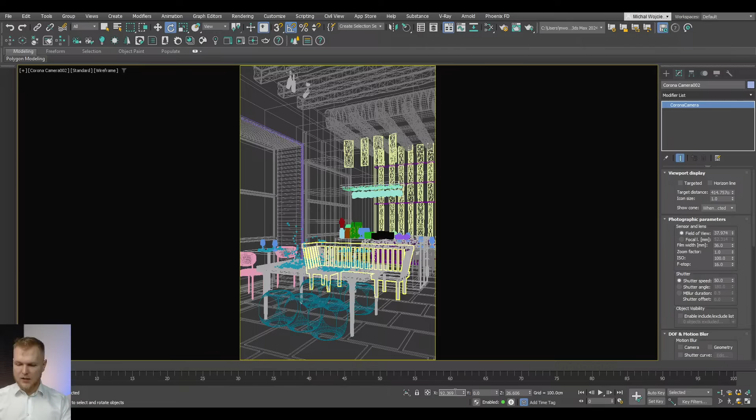So let's turn off the target and fix this. Let's fix that slightly. Okay, now we're looking at that, we're almost done. Time flies, so let's continue.

By the way, guys, sometimes when you set up your camera, you'll notice some elements slightly shifting. If that happens, make sure to reactivate or deactivate your tilt shift correction, because sometimes it can look a little funny.

Have you ever used Unreal or Unity for rendering and real time walkthroughs? Yes, I did. I played with D5 Render, worked with Twinmotion, worked with Unreal, worked with Unity - sorry, my brain got foggy there. I also tried out a couple of smaller programs, including the game engine created by Autodesk that was later discontinued. That was my big plan to use it the most, but since it was discontinued, that's no longer the case.

So I'm going to be testing Vantage, and I'm also going to be testing Enscape at some point. There's a lot of stuff on our agenda, but I'm going to be making webinars on those programs eventually. That's something I wanted to chat with you guys about.

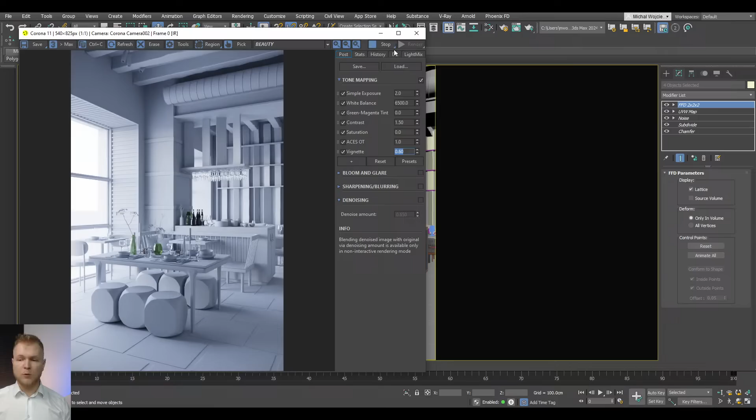The lighting is mostly done, but we're going to change two things. What I don't like about this image is that we have a bit of a bad time looking at it with the colors we see. There's a lot of blue, and I don't want to shift my temperature because that's going to change everything about the materials I'm setting up. I want to use textures as they are provided, so I don't want to abuse the system by changing and filtering everything to fit one another. In that case, I want my light to be as neutral as I can.

So for that, I'm going to create Corona Sky in the Material Editor. Here we'll jump to Corona Color Correction, and from there to desaturation. Typically I'll desaturate my Azure sky or any sky map to something around 60%. A nice trick would also be to enable clouds in Corona if you want a little extra fun, because now we'll have a totally different read of our scene. First of all, it's going to appear as if it would be a slightly brighter one.

Okay, I lied because I didn't even copy this map yet, so let's make sure to add the map properly. Let's go to scene, a little bit lower, and now I'm going to drop the new map just like this.

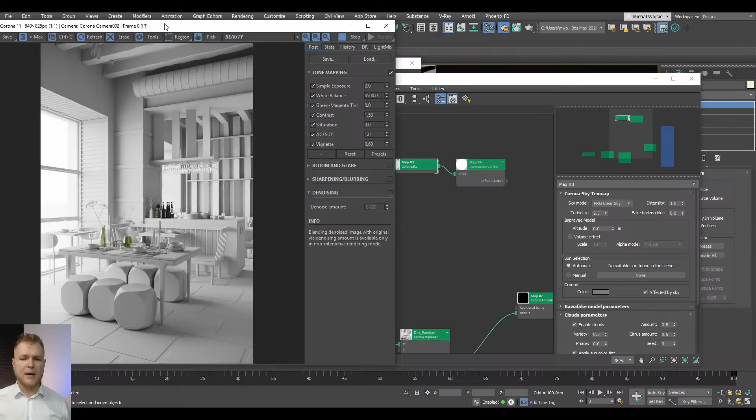Does your course follow a final Autodesk exam? No, we don't have any final exam because our training is... again, you weren't supposed to ask about that. Okay, so you got me. The thing is we don't have that exam because our training is so complex and it's mostly about architecture, so it's a totally different theme, to be honest. But no, we don't have it.

Okay, bloom and glare, let's turn it on. The lighting is looking really good, I like it already, so we're going to move on to the next step, which is our materials.

Let's start with the elements that are the biggest parts of our scene. The first part we're going to work with is this gigantic wall. In the reference, it's quite pinky-ish, so we're going to try to do exactly that in our case.

Let's go to Chaos Modeling. I want to see the reference once again, the real reference. So we need this to be a pinkish, reddish wall. We need a nice planky-looking texture, but randomized nicely. We need a nice texture to represent our bricks, and we need to create some kind of material for all the wooden elements, plus concrete and some scratches and details. A lot of that is going to be important.

Let's start with this wall because that part is going to be the most important. In this case, what I'm going to do is Control A everything, and make sure my object is set to Material ID 1. Why? Because I'm going to change this specific wall to ID number 2. For that, I'll Alt-Q and zoom out to make sure this wall is going to be my Material ID 2. This wall specifically is going to be left unchecked, so we're not doing anything to it, but I'm going to show you something that will help your scenes look a little bit better in a second.

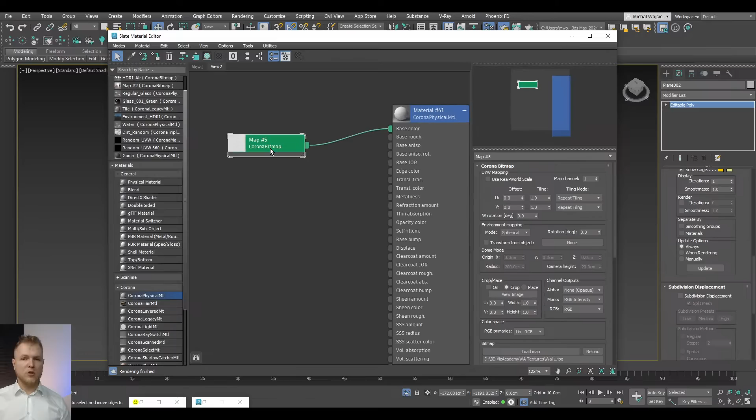To make sure I can use this texture as an addition to my wall and not the most important part, I'm going to first set up the color here. Let me go back to my camera for a second, and we're going to play around with the color itself. There's already a lot of colors in the scene, so not every color is going to be consistent if we keep it this way. But it's easier for me to at least add the color and notice that a lot of color bleed is happening in the scene. Color bleed happens when you have a very strong color and it reflects off your walls or any other object. There's a way to completely mitigate this effect, but we're not going to do that because what we're doing later is going to save us a ton of time.

So how do we use this texture? I can do two things. Either just plug it in and change this to make sure it's applied, but you can see that looks weird. So I'm going to use 3 chains. First, it's going to be a randomization chain - Corona mapping randomization. In my case, it's always going to be set to -1, 1, -1, 1, -1, 1, mesh element instance, so it's easy, with 360 degree rotation so there's no repetition. Because I don't want to work with any kind of UVW mapping - I want to keep that for the tiles or bricks - I could use the Corona Triplanar map, but that's overcomplicating things. So let's add an actual UVW map to our object. Let's go slightly higher. Deselect any polygon, edge, or vertex selection, because otherwise the UVW map will only apply to that certain element on your model.

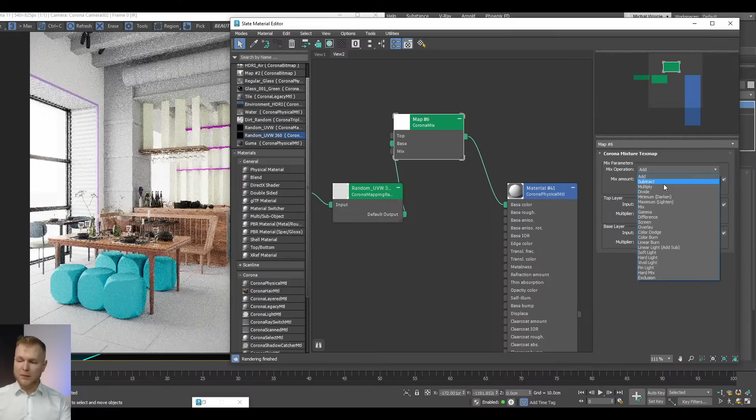So let's make sure to add this in. And now, instead of adding, we're going to be multiplying our texture. This color is multiplied by the second one, and we'll see there's a little bit of detail in our wall, and we're already applying the color to it. Now I'm just going to take away some saturation of this texture, maybe a little bit of brightness, because I found it to be too bright. I'm not going to precisely go for each and every tone.

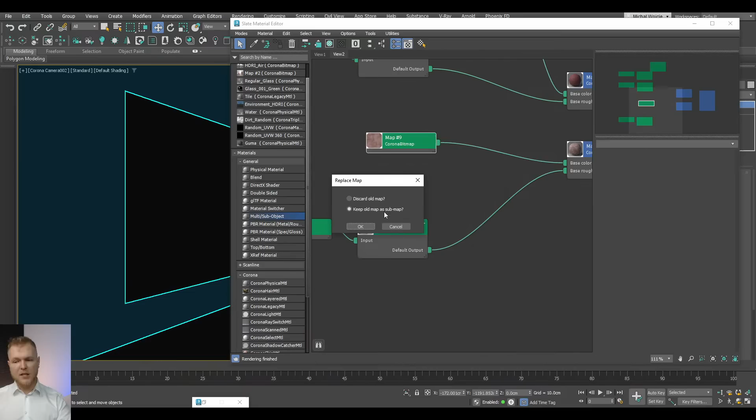You're going to find billions of textures, so in that case it's going to be super easy. We don't need the mix any longer, and we no longer need the randomization for the bricks. Bricks do not like to be randomized for the most part, but what they do like is color correction - in some cases we're going to slightly correct the tones in them, and that's going to be helpful.

Randomization stays here, and we're going to add another map, either in displacement or in bump. I want to go for displacement, because in this case it's going to be easier for me to work with a nicer texture.

Hello, what's your PC specs? My PC is now a little bit outdated, so I wouldn't necessarily recommend my computer specs. I've got 64 gigabytes of RAM, Threadripper 2970WX - those are the most important two components.

But if I were buying something, I'd be looking for affordable performance - I'd look into Intel 14900. This is the processor one of my students gave me a tip on, and that's something I'm really discussing with myself right now. I'm renovating my house, and it's really hard not to buy a new computer and instead get better equipment into the house, which isn't 3ds Max related, but I kind of want to. So yeah, this is something I struggle with right now, definitely something you can also consider.

Okay, let's make sure to shift the color a little bit closer to the yellow, orangish color.

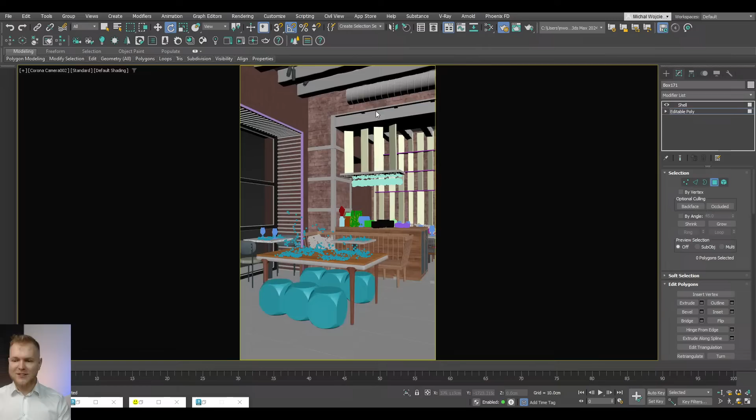So super appreciate that. Okay, let's Alt-Q this because I want to only create the stripes. I need those in that place, and we are done. So okay, where are they?

Let's look at the reference because maybe I'm doing something weird. Okay, so this is supposed to be nice and red. Perfect, I need better bricks than mine. The wood, okay, wooden material number 2. This is copied - we're going to create concrete.

Okay, so perfect, we pretty much got all of that. So let's take a quick glance at our scene. This is how it looks so far. Not bad, not bad, so let's continue.

Slight desaturation on the texture side is going to be needed, so minus 0.05 probably - that's going to do the trick, because right now I think it was a little bit oversaturated.

The Chaos Campus effect, learning from each other - that's exactly what we're here for, and I really appreciate that. I'm really loving this. So let's continue.

Now let's select all the beams and all of the wooden elements in our scene. Again, it's going to take a second, so I'd rather hide the walls and start selecting the wooden elements one by one because it's easier.

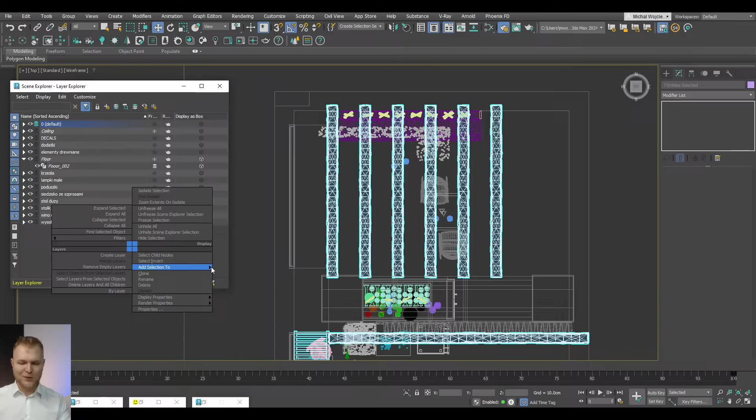Okay, so now let's select this object, that object, and that object, and this object. I really should be working with layers at some point, especially since this is going to take a while to select. So let's put all of those in some kind of layer - wood. Now that looks good. Let's hide what we selected so it's not going to get in our way. Now pick layer, wooden elements, and we've got it.

So pretty much most of the wooden elements are now selected on that layer, so we can just hide and unhide them. I'm just going to select child nodes, and we'll continue our work. As I mentioned, the essence of wooden material is always going to be the mapping, because there's no other way to work with it. So let's just make sure to make the mapping as simple as possible.

But before we get into it, we're going to make sure to prepare the material we're going to be mapping. And you guessed it, I'm just going to copy the same material yet again to keep it simple. The trick to almost all wooden materials is to keep them simple, and what you want to get your hands on first is a nice texture. Again, I'm going to use one of the textures in my library - it can be anything, but preferably choose a wooden texture that's seamless. Something like this is a good idea.

So let's just open up. Color correction, we're leaving that, and we're going to apply a couple of extra maps. Map number 1 is going to be our multi-map material. Why? Because we're going to be adding a little bit of randomization - not a lot of it, just a dash.

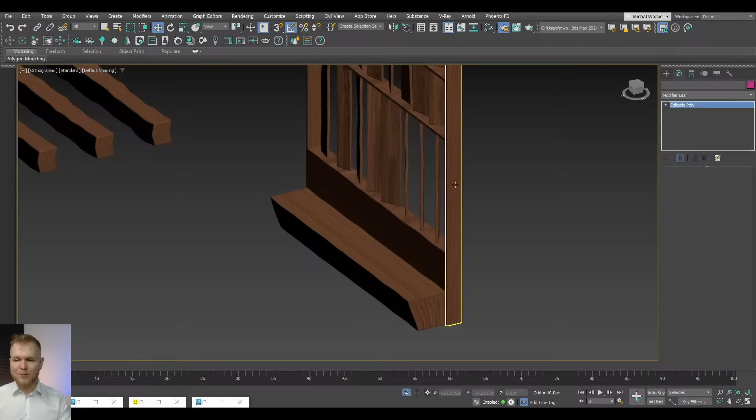As I said, we mapped those objects prior, so it's easier for us, but we still haven't mapped a lot of those parts, and you kind of want to do it as soon as possible. So let's cancel that, okay, paste the modifier. Perfect, let's rotate the mapping so it's going to go from left to right.

We don't have to care about details like this, it's just not going to be important. Here you can see that one thing is going to be a little bit obnoxious, and this is going to be texture tiling, which we're going to be fixing in a second.

Then we're going to be just moving on and adding another map here. Perfect, by the instance, okay, and we're going to be continuing by pasting this in as well, making sure that the texture doesn't cut through and it actually goes along the wooden beams.

So let's just rotate this, and this now looks way better because the texture goes from left to right, but we still will be forced to split those parts a little bit because otherwise we're going to be left with really bad mapping. So let's make sure that every aspect of the mapping is done here correctly.

Perfect, and now it goes well here but doesn't work there, so we need to make sure to kind of split this. Okay, let's select that. You know what, just to make this even easier for myself, I'm just going to attach that part, deselect everything, and now we can just apply our modifier just for that part.

And here the F2 trick comes in handy. Go to the editable poly, F2, go to UVW mapping, and now we can just move our UVW mapping and make sure that it's going to be exactly what we need, and make it so that it's going from left to right, and we're good to go.

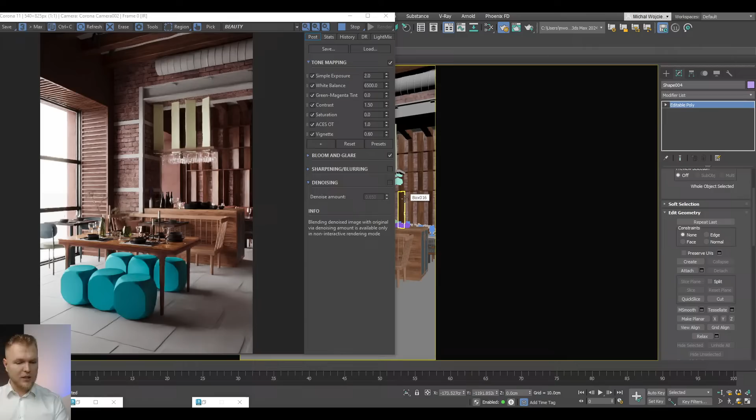I'm really wondering why so few artists, especially in ArchViz, are using the substance textures. They are perfect for most cases, free to get and easy to use, and most of them are just looking awesome and giving you several great features. So the Substance Designer is just another very complicated software that you have to learn to start using, and that's the only reason why people don't use it. They don't want to learn, that's all.

I'm one of those people because I am not that good at Substance Designer. I know only basics, and I know that it's very helpful, it's fast, and it's useful, but I just don't use it. I haven't found it that useful for me to really explain why I should spend another few evenings learning software that I can live without. I know it's good, I'm not saying it's not. It's just that most people do not need to learn 5 extra programs, and in ArchViz they do focus on making sure they select just a couple of programs.

So if you're going to be using AutoCAD, you're going to try to skip learning additional software. That would be SketchUp, AutoCAD, ArchiCAD, Revit, then it's 3ds Max or Blender. At that point, you don't have any mental space for additional software, especially if you're going to be an architect or a designer. Plus there are a few other reasons people don't use that software, but we're not going to get into that. You do not have to learn anything new, just download the textures and use them right away in 3ds Max.

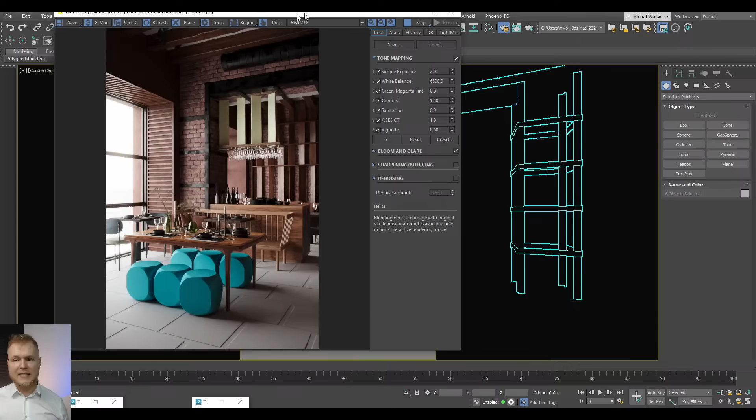How can I reduce render time for Corona render animation, because it needs 6 hours to render just 3 seconds, although my settings are not high? Mustafa, the thing is that Corona is designed to work on a very high level. So you're using a Ferrari to drag a boulder, while possibly you need some different equipment. If you're going for style and looks, you will go for Corona because it delivers very high quality. But if you're going for flexibility and speed, and can trade off a little bit of that quality, that's when you want to look into rendering engines that are GPU based.

So that's probably it. Now I'm going to show you something I really love doing with my metals, because now you can see that most of the metals in the scene are very dark-ish. So what I can do to navigate myself into not hating this image is add a clear coat layer that's going to be quite strong, so it's going to make all of those materials a little bit stronger.

But first I need to change all of those materials into actual metallic materials. So we're going to take a step back and make sure the darker elements are going to be metallic. Let's make sure we can work with slightly brighter colors so we're getting more reflections. I need slightly more, but still I want to keep the dark appearance, so it's going to be metallic but still very nice. Okay, that's exactly what I needed. A little bit more roughness, something around 0.5, that's going to be perfect for me.

Now we're going to apply the clear coat layer even stronger, because now I want to have a lot of roughness in that material. That way I'm going to get a little bit of spray of that extra reflection on top of it, and it's going to introduce a lot of random reflections. Since right now some of the metallic elements aren't reflecting the way I wanted them to, I'm going to also introduce additional lights.

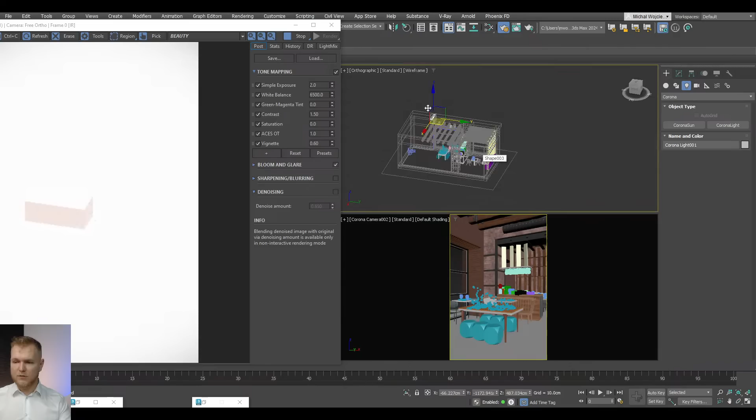Go for place highlight and start adding the highlights to your objects. Now, as soon as I place that highlight, and right now I'm looking at that image off screen, you'll notice there's a little bit of reflection, but possibly what happened is that the light is outside of the premises, so we need to check that out, and it is.

So I need to move it slightly closer to my object. If this happens and the object or the light is too far away, you want to go to local movement and move it closer to your object. That way you can go back to your main render, and you'll see that, yeah, I'm overburning everything, but let's turn off render.

Anyway, if we place the highlight it's going to be exactly in the position we chose, which is very powerful because we can add all the details we want in the positions where we want them. So long story short, I'm going to turn off all of the options but the reflections.

So now we're not going to be overburning anything unless we're literally in front of a beam like that. So we'll lower that, and this way we skip the beam, and it's still producing enough light to show us a bit more of the ceiling. But what we can also do instead, rather than directly adding light there, is force the reflection to appear by making sure there's more light on the ceiling itself. This is a trick used by a lot of photographers, where you add a bit more light to the ceiling itself. So let's make sure there's more of it with a little bit of directionality, not too much.

0.4, 0.5, and as soon as those elements are lit slightly, we're also going to see a bit more reflection in the object, because right now, as you can see, we're pretty much forcing the reflections into our scene by making the object that's supposed to be reflective reflect the elements.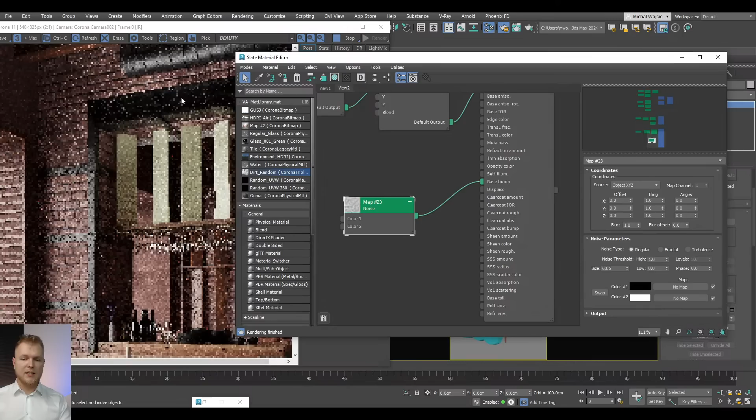So I'm going to force it by also adding an additional map, which is going to be just a general noise in the bump slot. So let's make sure to go through the whole thing, add the bump slot, and manipulate the structure of the object by going for something around 30.

Let's make sure the base bump is stronger. I'm going to force this object to deform a little bit, and by deforming it, I'm reflecting more elements inside the scene. So again, it's going to give me a little bit better reflections all over the place. And you can now see we're slowly getting there, to the point where they look really nice.

So let's move on to our floor, and we're going to be perfecting our background, but I still want to add one thing. Let's desaturate our wooden elements even more, like that, and add a bit more gamma, so we get a more worn out effect on our wooden elements as we go, and that looks really nice.

I want to have additional ceiling objects, so let's make sure the ceiling itself is selected for a second, and we're going to add the appropriate texture to it. So let's go ahead and select our explorer.

Mike, can we see render? I mean, I could, but it's hard to catch him right now.

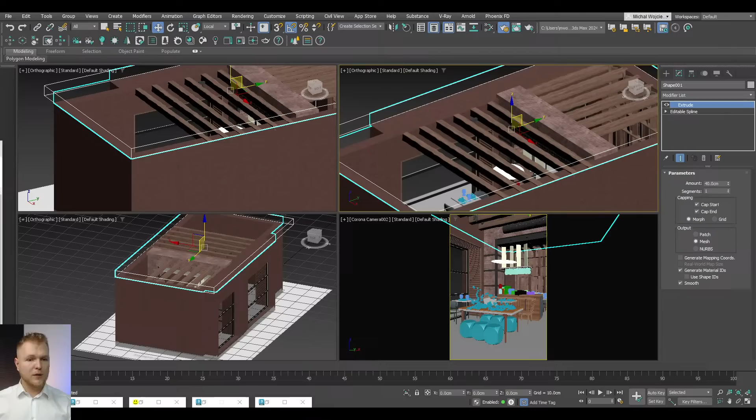I believe we're a little bit overdue. I'm going to show you how to build that lamp and probably the floor and the elements, and we're going to be balancing out some of the materials in a second.

As I said, we need to create one more ceiling material, so that's going to be either wooden or we can just select another texture that's going to be pretending to be planks. I generally do not use textures like that because I feel like using floor generator is a better idea in most cases, but I do have quite a great texture to use to begin with, so I'm just going to go for that. It's going to be easier for me, not necessarily for you, but it's definitely a good idea regardless. Since it's just the ceiling, I'm going to avoid using any roughness maps because in this case it's just not going to be necessary at any point.

As you probably noticed, I've also added a little bit - okay, let's take away the roughness map, let's go all the way to roughness one, and now we're going to be lowering the reflection a little bit, and continuing. So, someone's wondering about the wooden panel texture.

Thank you very much for letting me know that's actually a valid thing to say. It had to be annoying for you. Let's make sure to add those in. Thank you for letting me know, and now let's continue.

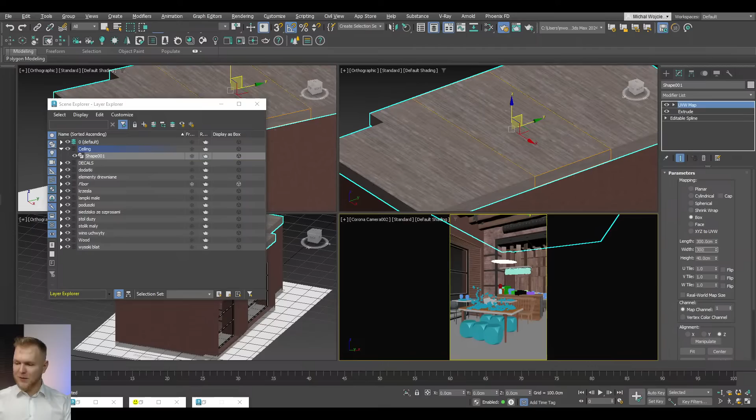So let's add a UVW map, and make sure to apply it—yeah, this is why it didn't look good. We're going to go for 300 by 300 by 300. In my case it doesn't matter that much, but I want to rotate it 90 degrees because it's going to fit nicely between the planks and the rest. Now it's time for the floor and the objects on the floor.

We need some kind of material, so I'm going to check what material was created for this by the student, because I'll be honest, I forgot to test it. Oh my god, this is a bit complicated. Let's examine it... okay, it's not that complicated, it's actually good. We're going to go for something similar, but do it on our own, step by step.

First thing is obviously a Corona physical material—that's the easiest thing to go for. Make sure to select all of the elements. Because I don't want to keep remapping them, I'll just add one UVW map to all of them, and thanks to the fact that we're mostly randomizing all the textures, it's going to look good. So, Corona bitmap, and we're going to add our first map.

This map is going to be either some kind of wood, dirt, or concrete type material. In my case I want to keep it simple, so we're going to go for concrete. Because this is concrete-like material, I'm also going to add another map here—our Corona map. A very important aspect of this is to make sure we add a Corona AO, which is going to add a bit of those dirty edges.

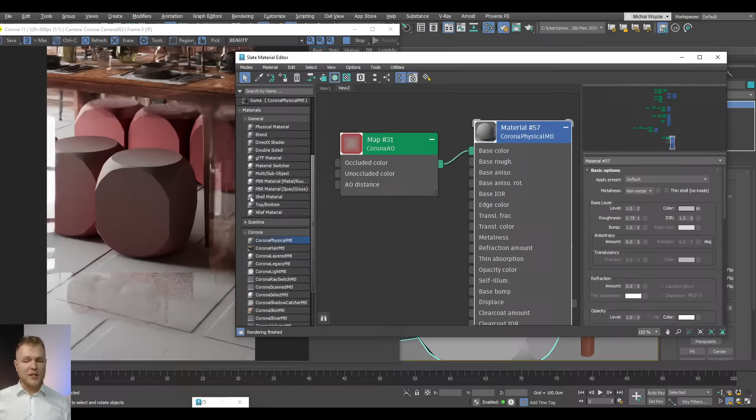So we need a bit of detail. First of all, the AO is way too big—100 is too much. Let's go for 5. How does it look? Nice, but not exactly what I needed.

We're going to change the outside to inside, because right now we're going to be adding a lot of edge trim around it. We don't need to add any color spread because that's going to be too strong and we'll get just red edges. Possibly we could keep that, but I don't want to, so we're going to make this absolutely neutral. Let's top up the value a little bit.

6 is looking fantastic. Now we need to make sure the mapping is added. Unoccluded color is our main color of the object, so you can see all of those objects appear slightly blocky, slightly more concrete, but I believe the UVW mapping I've added is a bit too big. 150 by 150 is going to probably fix this, and now you can see the texture is more densely packed, creating a lot of detail, which is going to make my life much easier.

Going back to our discussion about Corona round edges, this is where you want to use it—base, bump maps, and Corona, we go to Corona round edges and apply it in. If we go for it here, we're going to get a bit of nicer, rounder edges. And I'm going to show you something extraordinary in a second.

Let's add a Corona maps, Corona color correction—that's going to be map number 1, and we plug it into our occluded color. Depending on what we want to achieve, we're either going to add a darker color, so we get stronger edges around the object, or we can do the opposite and make this way brighter, giving us a little bit of worn out edges depending on what we prefer.

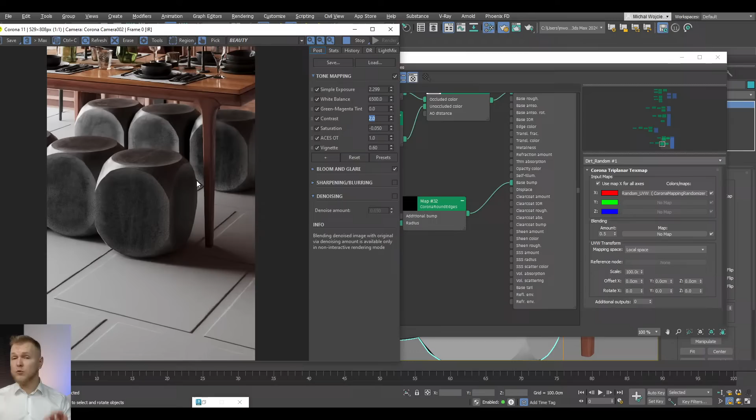Next, we're going to be adding the same map to our base roughness, so now the roughness of the object is going to suggest that those are a little bit worn out. And in the end, we can also add the same map to our AO distance, which is going to make sure those edges are now looking quite cool. In order to make this texture a little bit more dominant, I'm going to lower its scale to something around 35, so we're going to have more chipped edges, and you can see how cool they look.

So now I'm going to be adding a few extra steps. For example, let's add that color spread that I took away, so it's going to be stronger around the edges, maybe even too strong at the moment. So 0.2. Quality for some reason is set to 2, let's set it to 5, so it's going to be easier for me to see any detail.

And now look at that, we've got fully randomized objects that are fully texture randomized, and every element just looks different. But I forgot to randomize this map, so I'm just going to make sure to add that one map randomization we were missing. So UVW mapping, keep all the sub map, yes please. And now we're going to be adding this randomization by mesh element, 2, 1, 2, 1, and this is going to be 360. Anybody wants to know how randomization works, let me know.

Also, if we want to, we can swap the effect and literally just swap the two colors, depending on what you would prefer - black, dark edges and brighter objects, or vice versa, up to you. I think both work really fantastic.

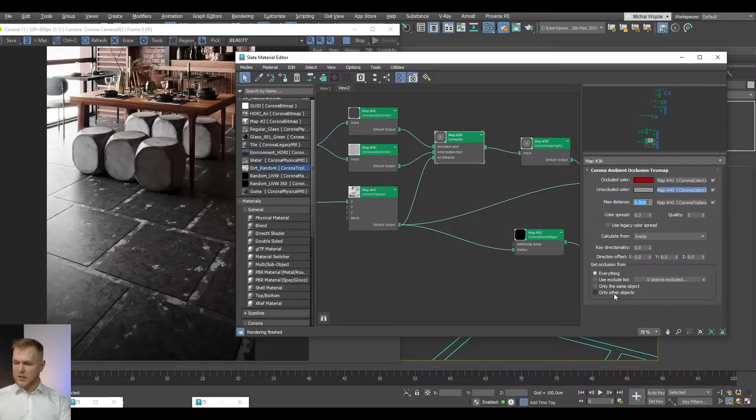Next thing I'm going to be doing is swapping the colors yet again, because in this case I want this... sorry, you know what, we're going to be lowering the AO version, and only the same object occludes. Okay, so it's going to be easier for me, and in this case I kind of want to... no, you know what, I'm going to go for outside, and now we're going to have a bit better edges, because the edges are going to be around the geometry, and you can see that it looks really nice. It doesn't, I kind of don't like it the way it is right now, but okay.

The reason why it is like that is that we didn't add any mapping to the object. So box, let's go for 250, 250, 250 on the floor.

3ds Max is really unresponsive with Forest Pack. Any tips using Forest Pack? Make sure to change the display options to dots, and try not to overwhelm your scene by adding all the objects at one layer and at once, because that's definitely going to overwhelm your RAM. At some point you're just going to hate working with Forest Pack like that. So this is something you want to experiment with a little bit, but mostly it's all about keeping your scene uncluttered.

So floor number 1, this object needs a bit higher shell, 0.9. We're just going to give a 1 millimeter distance between the floor and no floor, so it's going to be just a glimpse. You can see that now it melts thanks to Corona Round Edges. I absolutely love Corona Round Edges because it does this thing amazingly.

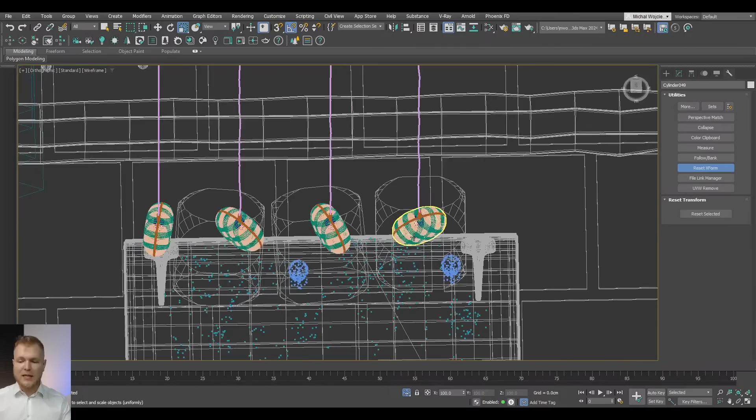Nice, we're getting there. The last thing I think we need to do is the lamp that I promised we're going to be making. We're going to examine the model itself, then copy the rest of them into our scene. The most important aspect of this is a slight amount of randomization, and it's all about using clever tricks. First, let's rotate it into the right position. Now you can see it's almost like a squished sphere, but it's not exactly a sphere - it's a different shape, a lathe modifier object.

What's the difference between the free course and your paid course? So the free course, you're pretty much currently on it - we're just having a little bit of fun doing specific scenes. But when it comes to our full experience, you're going to be prepared for each and every step along the way. Before you see me click something, you're going to get a video explaining why we clicked that. That's the best explanation I can give you.

So we need some kind of spherical object that's going to be nice and easy for us. We could use some kind of donut or other object, but I'm just going to go for a sphere and create something similar in size. There's a lot of detail here, so we need to make sure we follow all of it.

Now the first thing I'm going to go for is FFD box, right? Here we can see the box FFD is almost indistinguishable from a regular FFD. But what I want to do is set the number to 5 in width - well, the sphere is rotated, so it's actually going to be the height. Yeah, took me a while.

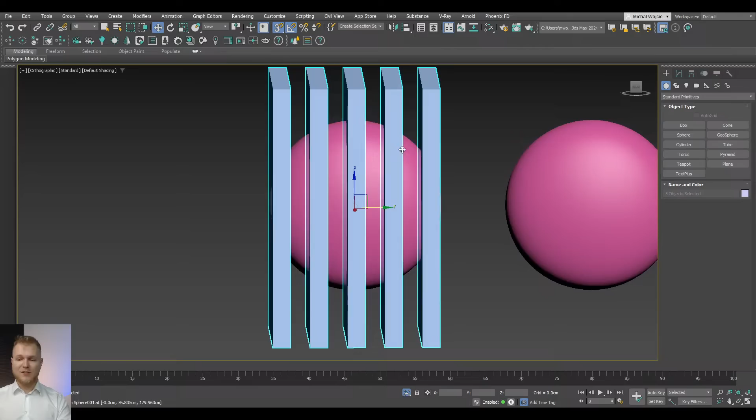Did I make those into instances? If I forgot to do that, we're going to just roll with it. So now this is going to be our 25 degrees rotation object. So 25 to 30, that's perfect. And now 60, perfect. So pretty much what we needed.

Now I'm going to be moving this to the second object, and you probably already guessed it, we're going to be using booleans on this one. So what we're going to do is go for a boolean, and we're going to go for subtract, and just start picking 1, 2, 3, 4. So this is going to create the main stripes.

Because I did a little bit of an oopsie, I was supposed to make those boxes a little bit thicker, so we could also scale them up a little bit locally. So let's do that. R local. And now we're going to be making those a bit thicker. So we're going to be taking away a bit of the more object.

So now the stripes in between are going to be slightly smaller. Boolean, subtract 1, 2, 3, 4, 5. And we're going to be repeating the process on the opposite box or opposite sphere. So, okay.

Thank you very much to 3ds Max for auto-saving. Sir, you explained tirelessly, it has been almost 2 hours. It was more than 2 hours already, it's 3 hours.

So, okay, let's go to Boolean. Now I got used to it because some of our webinars with our students, because of the amount of questions that my students can ask, sometimes take a while to finish, and that's why I'm kind of used to a longer experience like this.

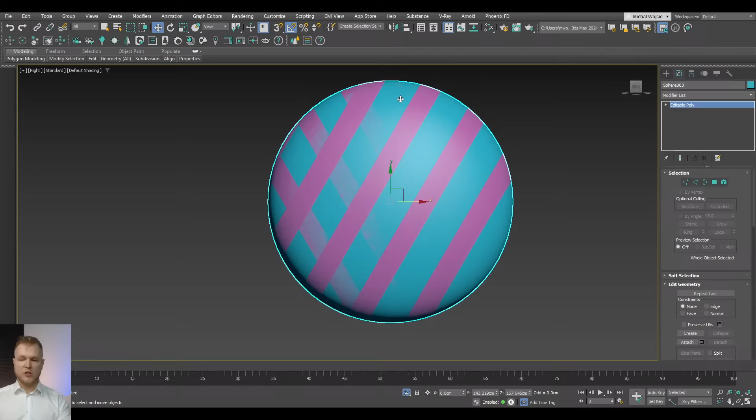So the easiest way to do it is to create a section object, and we're going to be just cutting it the way I'm doing it right now by rotating the object by approximately 60 degrees, as I did right now. You can see that it fits perfectly where we need it.

And now all I need to do is position the same object, or similar objects, next to one another. So I'm going to just place it straight again. Make sure to copy it a couple of times. So 1, 2, 3, 4, 5, 6. And this is going to be enough.

Now we're going to be moving this with the 30 degrees that we wanted. Okay, perfect. And I'm just going to be creating the edges exactly where I want them. The first one bugged out, so we're just going to create a shape, cancel it out, and you know what? Why is it not manually updating the section?

Come on, the first one got a little bit buggy, so I'm just going to not risk it and just move it away. Okay, copy. Why is it happening? Okay, so you want to play games.

Let's continue. Now we're going to be doing exactly the same thing for all of the openings. So let's go here and pretty much here as well, so this is going to be the two openings. But now we copy it and do exactly the same thing as we did with the opposite thing, but we can also rotate it that way, so it's at the right angle but the opposite side. Let's make this happen, please.

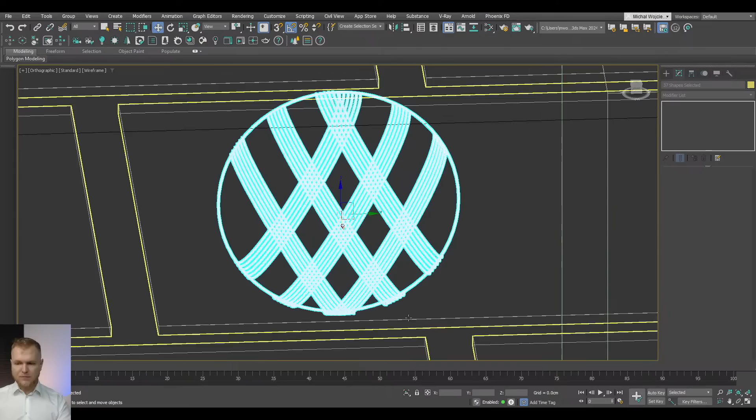We no longer need this button because it's just not needed, so we're deleting it. Unhide all, and I've lost the model somewhere in the scene, so we're just going to be selecting this element yet again, and finally we're getting there. I forgot one last thing that we need from this model is to select that edge, create shape from selection, linear, and now we can delete it. So we're selecting all this. Okay, unhide all things, and we just created the same type of lamp that we've seen in the scene before.

So now I feel that I am allowed to just simply copy those that my student has created. I know that it's not identical, but the technique is pretty much the same. So we're just going to be creating that, and this is how you can create a very custom looking nice object like this. Okay, let's move this, and if we add shell, as I mentioned, it's going to just pop in front of all of those splines, and it's going to look absolutely amazing. Make sure to also do it for the opposite side if you're into that. But for now, I'm going to be deleting this.

Hello, Adrian. Thank you. Pozdrowienia.

Nice to have you. So okay, let's continue. There are two lights that we don't need in our scene. So finally, let's grab those lights and wrap this up because we're now finishing this scene.

It only took us 3 hours. If I wouldn't be talking so much and answering your questions, honestly, this project would be taking me approximately 2 hours maximum because I would be drinking a lot of coffee in between. I mean, I would be taking breaks.

Regardless, we need a background. Okay, you know what? Background is going to be something that we're going to be talking about on a different webinar because I'm really done with today's webinar, I think you're going to be able to understand that. But we can copy it from the student scene and just pretend that we did it. So, okay, local, change to normal and move it in. By the way, we're getting there. Okay, perfecto, got the lamps.

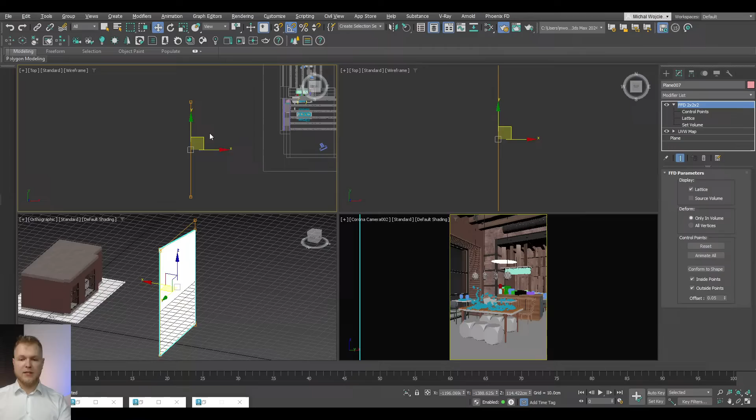How do you like that? So the background really finishes up this image, and I know we can play around with details, add a few more props here and there, and probably I forgot about like 50,000 objects in this scene, but everything you learned so far is going to be probably helpful to you. Just a side note, guys, you can also make all of that detail pop up a little bit more with your bumps by adding additional bump for the floor and the elements that really are important in your scene.

Before we get into the rendering moment, let's say, I would like to give you a quick info for the preview renders. It's okay to have denoising, but honestly I do turn it off for realistic work because without it you're going to see details first and not blur. Although you can see that now we're getting a lot more noise, I also get a lot more detail because it's not blurred out. At the same time, the scene high quality is going to be the right way of going for your scene. Pass limit, we don't use this unless you're going for animation. You're typically going to have to try to cut as many corners as you can to use pass limit, because that's strictly for animation for me.